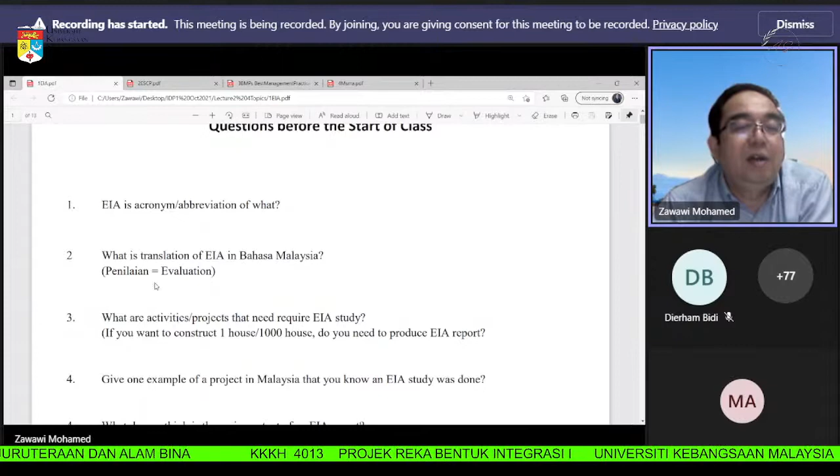What is the translation of EIA in Bahasa Malaysia? Sometimes people say it is penilaian kesan alam sekitar, but penilaian actually is evaluation. So the correct translation: assessment is penaksiran. So penaksiran kesan alam sekitar.

Okay, what activities or projects require an EIA study? Think about it. If you want to build one house, do you have to do an EIA study? No, right? If you want to build 1,000 houses, do you need to produce an EIA report? Let's look at the notes after this. Number 4: give one example of a project in Malaysia that you know an EIA study was done for.

Because if you read newspapers or papers online, you will come across articles talking about EIA studies, right? Can you recall what project that was? Oh, this is number 5. What do you think is the main content of an EIA report? When they do an EIA study, of course they will produce an EIA report. What do you think is inside the report?

What are the benefits of an EIA study? An EIA study is quite expensive. Normally it was maybe 500,000 many years ago, and a detailed study is several millions. So when the government makes it mandatory for a developer to produce an EIA study, there has to be a very good reason, because it is expensive. So what are the benefits? We will look at that after this.

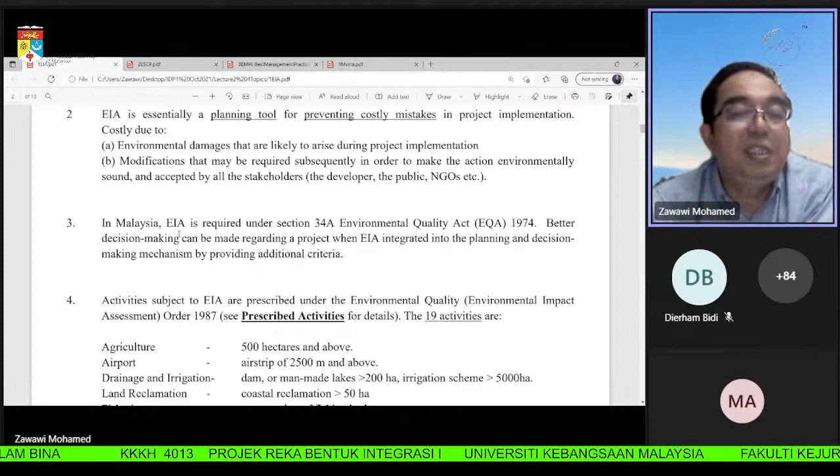Okay, number 3. In Malaysia, EIA is required under Section 34A Environmental Quality Act, EQA 1974. Better decision making can be made regarding the project when EIA is integrated into the planning and decision making mechanism by providing additional criteria. So the main point here is you list out all the possible impacts, and then you let the authority, basically the government, decide lah. So the government can make better decisions when they have all the correct information.

Okay, number 4. Activities subject to EIA are prescribed under Environmental Quality Order 1987. The activities are called prescribed activities. So there are 19 prescribed activities lah. Agriculture, 500 hectares and above. So if you want to tanam jagung 10 hectares, no need EIA. And then you have airport, drainage, irrigation, land reclamation, greater than 50 hectares. Fisheries, forestry, logging,

greater than 500 hectares. Housing, I asked earlier, if you want to build one house, do you need to produce an EIA report? No. If it is bigger than 50 hectares, yes. Industry, infrastructure, ports, mining, petroleum, power generation, quarries, railway, transportation, details are given lah. Of course, if you go read the EQA Order 1987, there will be more details there. But this gives you enough information lah to know.

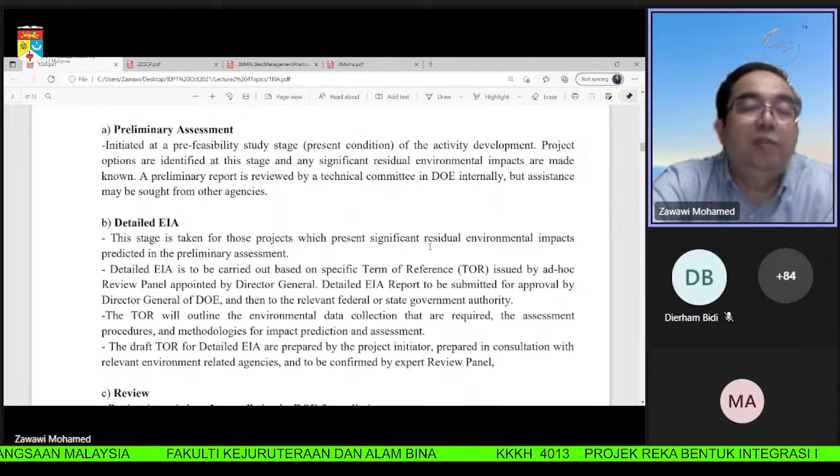Okay, EIA in general can be divided into 3 steps. Number 1 is preliminary assessment. Number 2 is detailed EIA, the stage taken for projects which present significant environmental impact lah. So the DOE will ask for a detailed study. This will be more expensive lah. You need to collect more data, etc. And then C is review, done internally by DOE and review panel lah.

Okay, number 6. EIA can help reduce the possibility of an environmental disaster. An example is the Bhopal disaster or Bhopal gas tragedy, which is a gas leak incident in India, considered as one of the world's worst industrial catastrophes. This occurred in 1984. Later, if you have time and you like to know more, Google Bhopal disaster. Very, very sad incident, because the gas leak killed many people and caused many injuries lah.

The injuries caused people to be blind. Some sort of acid damaged the eyes, caused people to be blind. Very, very sad incident lah. You can read here, 558,000 injuries. We don't want that. Imagine a disaster like this happening in Malaysia because you are careless or you allow a bad project to proceed. So very important to be ethical lah. Do your job as a civil engineer as best as possible.

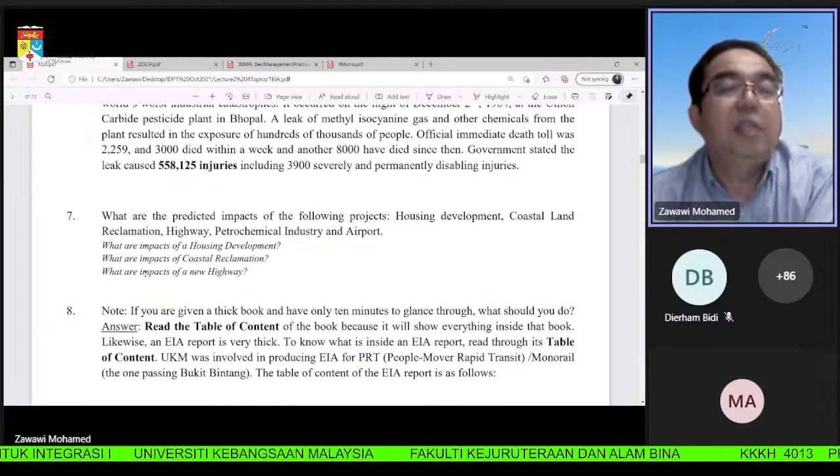Okay, number 8. If you are given a thick book and have only 10 minutes to glance through, what should you do? My suggestion is you read the table of contents, because it will show you everything inside the book lah. Likewise, an EIA report is very thick. To know what is inside, you look at the table of contents. So this is for one project that UKM was involved in. I was also involved in this project lah. It is the monorail project. Earlier, it was called People Mover Rapid Transit, PRT. So this is the EIA report for that project lah.

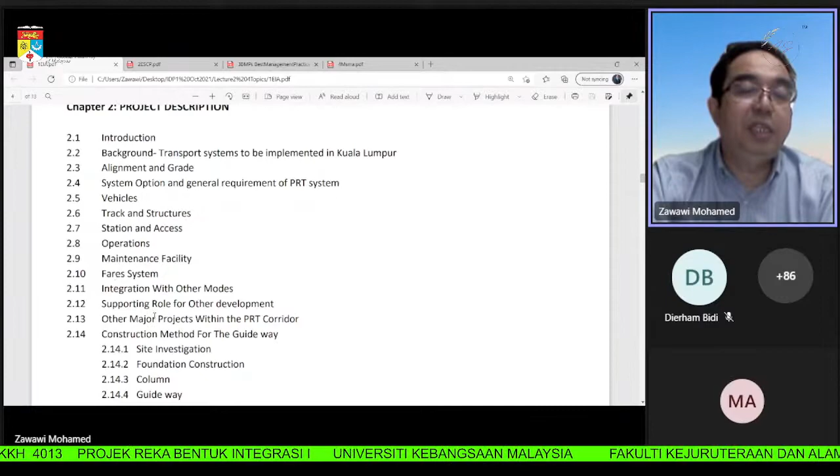Let's go through. Chapter 1 is introduction. Statement of need, route options. This is basically general information about the project lah. Now, chapter 2, project description. Vehicles, track and structures, maintenance. More information about the project. Here you can see construction method for the guideway. Implementation schedule. That is basically more information lah.

Okay, now we go to chapter 3, existing physical environment. An EIA report includes this very important chapter, existing physical environment. What info do you put there? You can see here, topography and climate. This is the physical environment before the project starts. So you give data about geology of KL, seismicity, land use, water quality. If there is a river, then you take the water sample, you determine water quality. Why? Because later on, if the public complain your project caused damage to water quality, you have data to prove.

No, we check the water quality before the project. It is already like this, for example. Then you protect your project lah from baseless allegations or something like that. Yeah? Same as air quality, noise level. You want to know the physical environment before your project. Okay, vibration level, existing traffic, biological system, socioeconomy, etc.

Because if you want to, for example, build a noise barrier, it is expensive. Everything will be expensive. If you want to rehabilitate a river, things like that, it's expensive. So you have to make sure the damage was actually caused by your project, not by other things. That's why you need this chapter 3, existing physical environment.

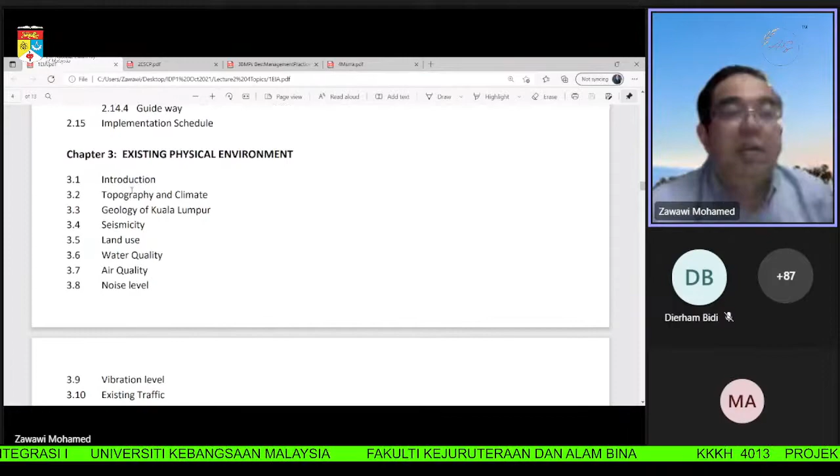Okay, chapter 4. Now I said earlier, the main content of an EIA report is the list of potential impacts and mitigating measures. So you can see here, chapter 4, potential impact and mitigating measures during construction. Let's look at chapter 5, potential impact and mitigating measures during operation. So they do both. This is during construction, and then after that you also do it for during operation.

So if you look here, 4.2, list of construction activities. When we want to know or to predict the impact, we have to know what the activities are. So you have to know the whole thing about your project, then list the construction activities. Then only you can identify the potential impacts. So you list construction activities and then you consider the impacts in the aspect of geotechnique, water quality, air quality, noise level, vibration level, biological system, socioeconomy, blah, blah, blah.

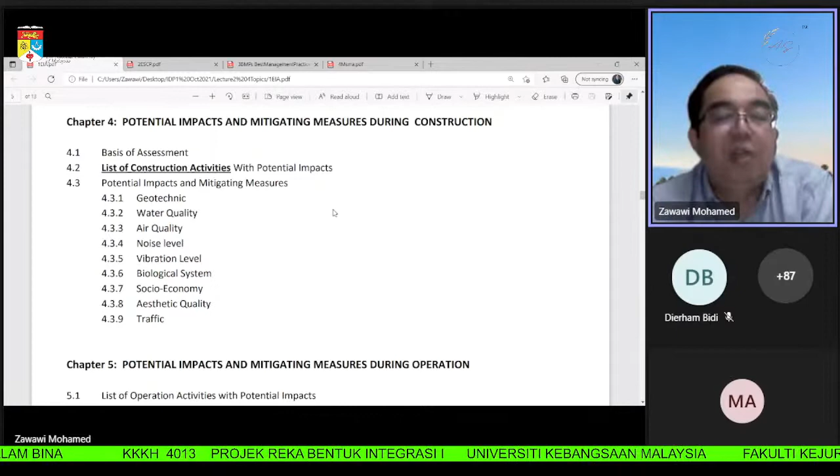Okay. Then chapter 5, the same thing. This one is potential impact and mitigating measures during operation. Okay, if you consider the PRT project, during construction, what is the noise? The noise may be piling, right? Preparing the foundation and then all the works lah. After the project has been completed, is there still a noise problem? Yes. When the train passes through, there will be noise. Right?

What are the impacts? There are many lah. That's why you have to list. Here, chapter 5, potential impact and mitigating measures during operation, and then you list in the aspect of water quality, air quality, blah, blah, blah. Okay, chapter 6 is not really related to EIA lah, but you can go through it to understand the content of an EIA report. So you have emergency response plans. If there is a disaster, things like that, you have to consider that.

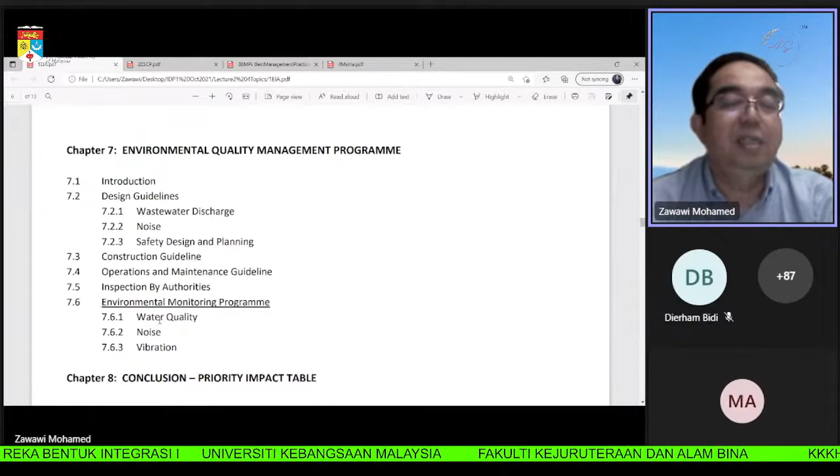Okay, chapter 7, environmental quality management program. Environmental monitoring program. So some projects, during operation, continue to take data of water quality, noise, vibration, to make sure that the project does not damage the environment. Of course, if you are building a very tall building or something like that, that one no need lah. Definitely there will be no changes to noise, things like that. Okay, chapter 8, conclusion and then priority impact table. Okay, that is basically the EIA report lah.

Okay, so here is my comment. Number 9, chapter 3 is existing physical environment before the project starts. Here you need to get the baseline data. And then later, during the construction phase, you get another set of data, so that you know what the impact of your project is to the environment during construction. Okay, here in the operation stage, you take another set of data.

So you have all this data, then if there are public complaints, etc., you have the data to back up your comments lah. For example, my project did not do this, did not do that. You have the data to prove it lah. Number 10, the difference between these three sets of data, pre, during, and post construction, shows the impact of the project on the environment. If the difference is too significant, more mitigating measures need to be added to reduce the negative impacts. So you will know what to do based on the data that you collect.

Okay, number 11. Another project in which UKM was involved in producing an EIA report is as follows. From the write-up below, you can get information on the content of an EIA report.

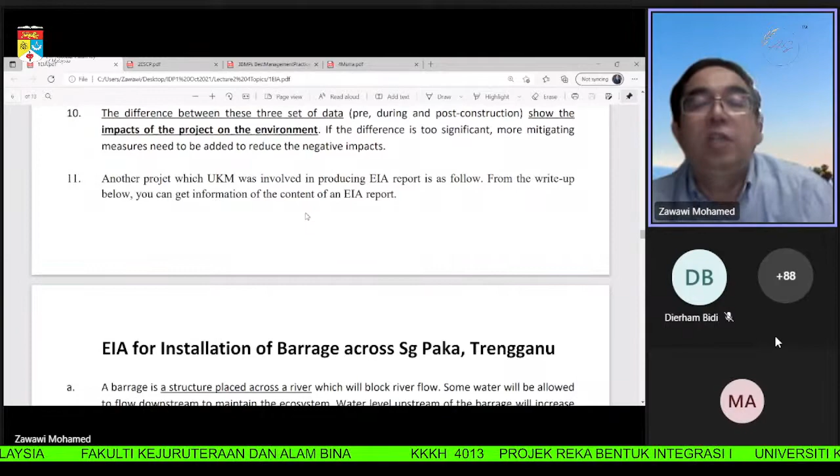Number 11. Another project which UKM was involved in producing a report is as follows. From the write-up below, you can get information on the content of an EIA report. This is another project I was involved in: EIA for installation of a barrage across Sungai Paka, Terengganu.

What is a barrage? A barrage is a low structure placed across a river. If you look from far away, you cannot see it, because the structure is under the water surface. Its purpose is to cause the water level upstream of the barrage to be higher, to be increased.

Let's go through the report. The main content of an EIA report will include the following: list of project activities, potential impacts, and proposed mitigating measures to reduce the impacts. So the first one is project activities.

Imagine you want to build a barrage at Sungai Paka in Terengganu. What are the activities for that project? Number one, you have to construct an access road, because you need to bring heavy vehicles into the project area. When you construct the access road, there is already impact to the environment.

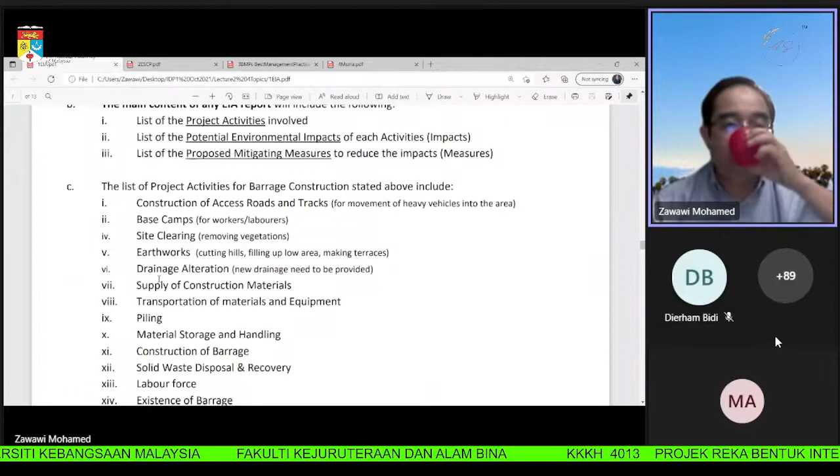One moment. Otherwise, I lose my voice.

And then supply of construction material - you have to imagine the sequence of things you need to do at your project, for example transportation of material equipment, piling, material storage handling, and so on. There are many activities. After you list down the activities, then you start to think about the impacts of each of these activities, each component of the activities.

Let's look at the impacts. It will look like this: the construction of access road impacts - erosion of soil and rock may occur during raining time. When you construct the access road, you remove the vegetation on the soil because you want to put in the gravel, the small stone. So if it rains, the rainwater will carry the loose soil into the river. This is the impact.

So what are the measures? What do you do to solve that problem? Drainage ditches must be well designed. Another impact: visibility reduced due to dust clouds generated by vehicles or dispersed by wind gusts. Although you put in the gravel, there will still be loose soil - if it is dry and windy, there will be dust clouds. So what measures can you take? Water should be lightly sprayed onto the affected area.

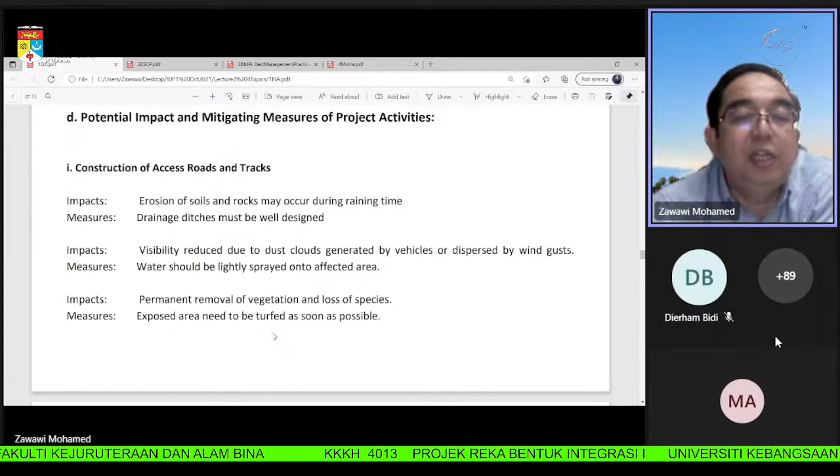Impacts: permanent removal of vegetation and loss of species. Measures: the exposed area needs to be turfed as soon as possible. So you can see here how you list down the activities, then the impacts, then the measures. That way you tackle one by one all the possible problems. Okay, let's look here.

Earth disturbance would increase water turbidity and suspended solids. Some developers, because they want to save cost, when they rent a bulldozer, they bulldoze everything. That is not good for the environment.

You should minimize the removal of trees, because when you minimize it, the roots of the trees continue to hold the soil, so you don't have much erosion there. So the measure says earth disturbance should be minimized, cut as few trees as possible. Disturbed earth surface and slope should be recompacted and planted with grass as soon as possible. So when you compact, you spray grass seeds, the grass grows, and then there will be less erosion after that.

Impact: construction of access road can be hazardous to local people and the public. Measures: warning and signboards. So you can see how you basically tackle one by one all the possible problems that might arise.

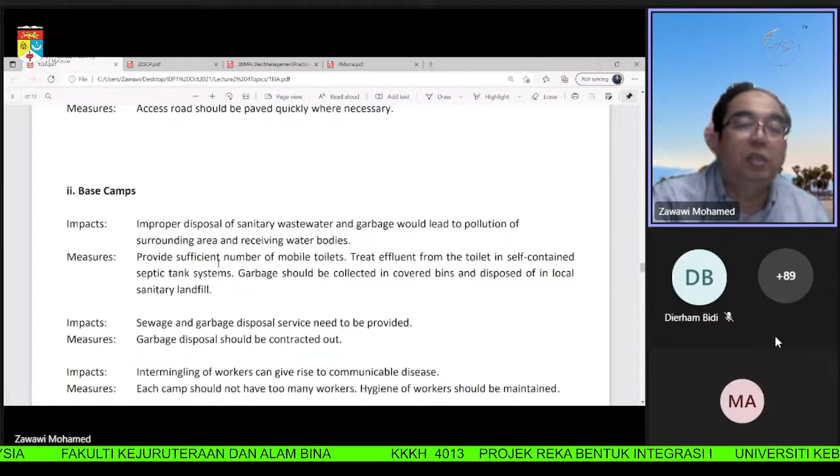Okay, let's look at base camp. Base camp will have its own problems. Improper disposal of sanitary wastewater and garbage could lead to pollution. Measures: provide sufficient number of mobile toilets, and garbage should be collected.

So you go through one by one to understand site clearing, what are the impacts, what are the measures. Earthworks, what are the impacts. This, for your end of semester presentation, you need to put in also.

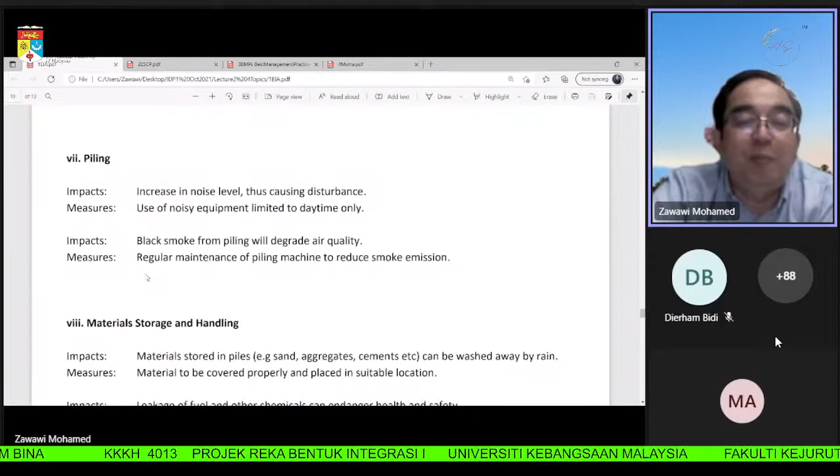I ask you to provide one chapter for EIA, so that you need to think about the components of your project. But the main points are already in here. You just look at which one is suitable, which one fits your project, which one doesn't fit your project. Don't copy paste everything, then we know, and we punish by giving you low marks. Because each project has a different list of activities, then definitely the impacts and measures will be different.

These notes are gathered online, I just Googled and copy pasted them here. You can read this yourself: environmental definition, environmental assessment, objective. Why do we need EIA? To prevent environmental problems and seek to avoid costly mistakes. Remember the Bhopal incident? We don't want 500,000 Malaysians to be seriously ill. That's why EIA is very important to protect the public mostly, and also to protect the environment.

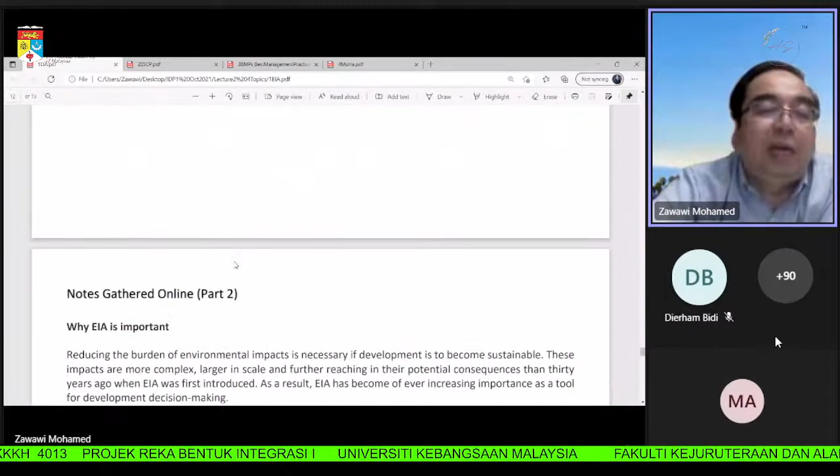Regulation in Malaysia regarding EIA: EQA 1974 prescribed activities. If you want details, you can Google and go to the EQA 1974 write up. This is more things I gathered online, I'll let you read this.

Any questions about this? Class, any question? No questions? Okay, you read it later, you can read it yourself.

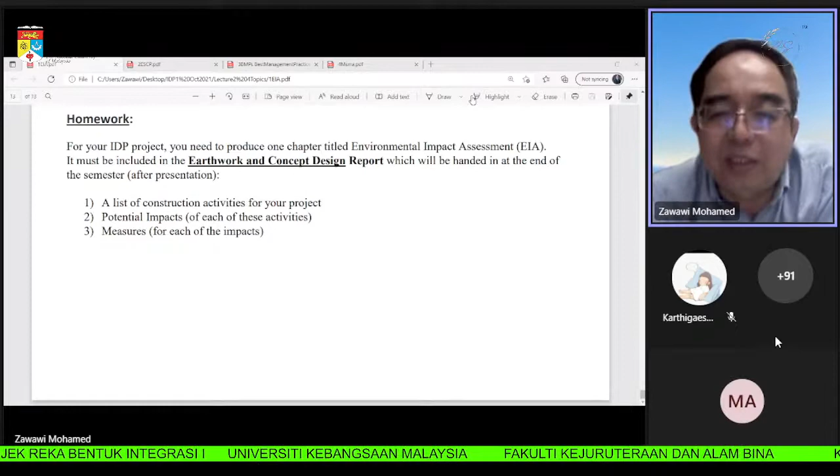I will share this one. I want to go to the next topic, let me change my slide. Okay, and then I will share this one too.

Wait a moment. Okay, can one person confirm for me, can you see the slide erosion sediment control plan? Yes sir, can, thank you. Yes doctor, can, okay thank you.

Erosion and sediment control plan, ESCP. If you are a civil engineer, you have to be very familiar with this, again because we want to protect our environment. So when you come across ESCP, remember it stands for Erosion Sediment Control Plan, meaning the plan you put in place to control erosion and to control sediment.

Most developments require clearance of vegetation from the project site. Removal of trees and vegetation results in production of loose soil. When it rains, the rainwater will carry this loose soil into the drainage system and eventually into the river. If there is so much loose soil, the river will become shallow, and when there is monsoon season or heavy rain, you might have localized flood because of this. That's why we want to protect our environment, it will cause damage to property and things like that.

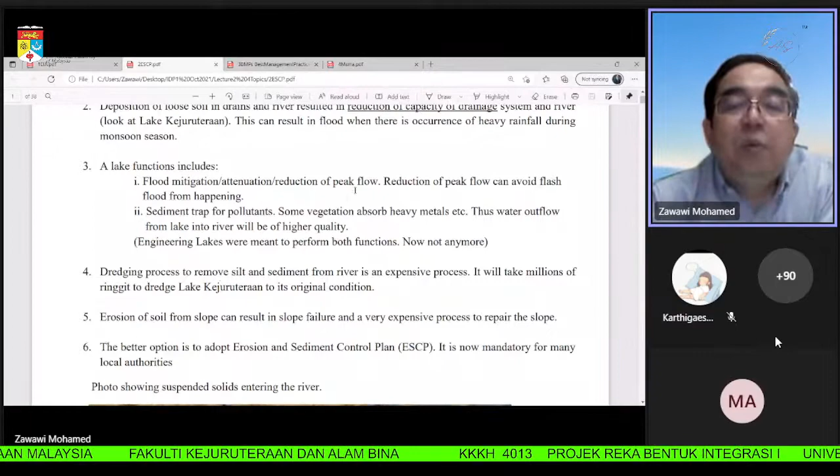Okay, let's look at number three. Lake functions include, what are the benefits of a lake? It helps in flood mitigation. It reduces peak flow, which can avoid flash floods from happening. It also acts as a sediment trap for pollutants. Some vegetation absorbs heavy metals.

If you remember Putrajaya Lake, they have wetlands. Water from the river will pass through wetlands and then only enter Putrajaya Lake. So the wetlands remove the pollutants. They plant some vegetation to absorb heavy metals from the water, so the water becomes much cleaner.

Dredging to remove silt and sediment from a river is very expensive. For Kejuruteraan Lake, if you are to dredge the soil and restore the original lake, they made a calculation. It would cost, if I'm not mistaken, 3 million or something to dredge all the silt from the lake.

Very expensive. Number 5, erosion of soil from slopes can result in slope failure, and repairing the slope is a very expensive process. The better option is to adopt an erosion and sediment control plan. So you follow what is in the ESCP, then you will not cause damage to the environment.

In Malaysia, it is now mandatory for many local authorities. So let's say you want to do a project in Kajang or in Bangi, you have to prepare an ESCP for your project area. What is the plan to solve this erosion and sediment problem? So you produce this plan and then pass it to the authorities.

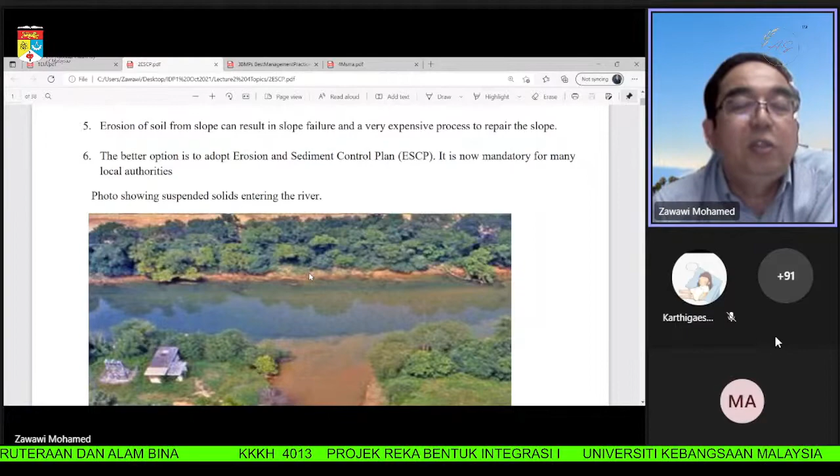Let's go through some effects showing how serious the problem of erosion and sedimentation is. I Googled photos online so you can see here. When you see water like this, what does it mean? Here it is clean, right? Clean water, not much suspended solids, meaning upstream there is not much erosion. But this river branches upstream, and definitely there is erosion happening. From what? Most likely people are clearing the soil. They remove the vegetation, and when you remove the vegetation, you produce loose soil. That loose soil will then enter the river.

Okay, here is another example. You can see clear water, and then this is water filled with suspended solids. Here is another example. This river upstream is okay, but this small river, yeah, there is erosion upstream. Here's another example, something's happening upstream.

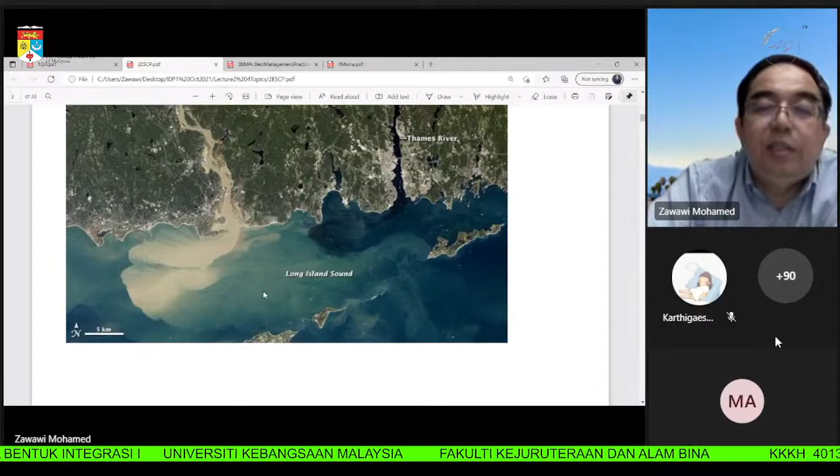This satellite photo, is it? This shows very serious erosion upstream. This is at sea already, I think. If it is at sea, not so bad, because the tidal action etc. will remove this sediment. But if it is a lake, then your lake will become smaller, and it will become damaged like Lake Kejuruteraan.

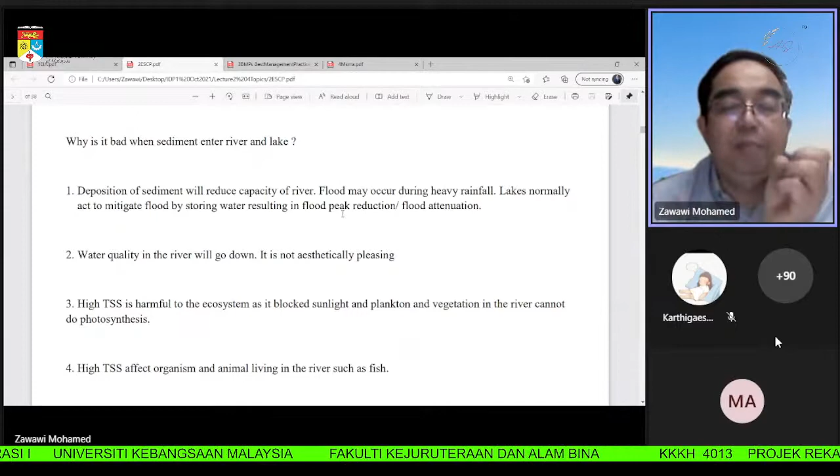Okay, why is it bad when sediment enters a river and lake? Number one, the deposition of sediment will reduce the capacity of the river. Flood may occur if you have heavy rain and big runoff, then the capacity of the river is not enough, it will overflow the river banks, then you have a flood.

Number two, why is it bad? Because water quality in the river will go down, since when you have suspended sediment, water quality goes down and it is also not aesthetically pleasing. And if you have fish and various animals inside, it will affect all these animals, it is not healthy for them either.

Number three, high TSS is harmful to the ecosystem as it blocks sunlight. Plankton and vegetation in the river cannot do photosynthesis, so you damage the whole ecosystem. Suspended solid is harmful to the ecosystem.

Because if the plankton and vegetation cannot do their photosynthesis, then maybe they start to die off, and after that the fish will die, and then the ecosystem will be damaged. Number four, high TSS affects organisms and animals living in rivers, such as fish.

Okay, question. You are a civil engineer at a large construction site where a large area needs to be cleared of vegetation. What can you do to avoid what happened above? You can see how the sediment is carried by the water into the river. So you don't want that happening at your project. What do you do? Some people protect the environment not because they love the environment, but because they are afraid of penalty. So think along that line also.

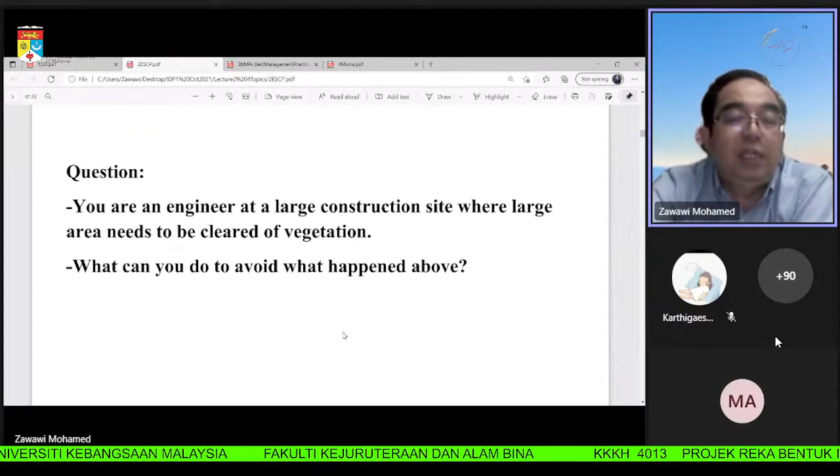Because if the authority finds out you are damaging the environment, they can give you a stop work order. With a stop work order, you cannot do anything until you solve the problem. Then it will cost you a lot of money. The owner of the project will be very angry, very unhappy, because when you stop work for, let's say, 2 weeks, it costs a lot of money. So follow regulation, follow the ESCP, and avoid the problems.

Okay, my question here is, what can you do? To avoid this problem, the construction industry needs to adopt best management practices, BMPs. Look at the MASMA manual for the chapter on BMPs. I think you got the soft copy, right? If you don't, Google the soft copy of MASMA. Go through the table of contents and find the chapter on BMP, best management practices.

Okay class, for IDP, as I said earlier, it is different. IDP and FYP are different compared to your other courses. You have to do all the work yourself, search the manuals, read through them, meaning a lot of self-learning. Other courses, you have the textbook, you read, you understand the chapter, you take your midsem and final, and everything is done. But IDP is different. There are many manuals for JKR, for DID, etc. You need to read all these manuals to understand how to do the design. That's why it becomes problematic to many students.

I introduced the MASMA manual to you in hydrology class in second year, right? So go to the MASMA manual. There are many chapters. Find the chapter on BMPs. There is info there. So please add all this in your IDP final report with more contents. Meaning take out the main points from your MASMA manual, then put them into your IDP report, the concept design.

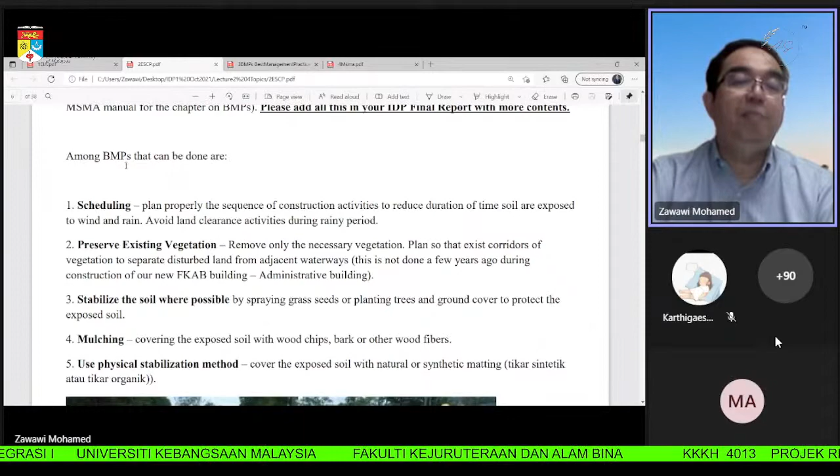Okay, here I list what you can do, among BMPs that can be done. Again, BMPs is best management practices. Number one, scheduling. Plan properly the sequence of construction activities to reduce the duration of time soil is exposed to wind and rain. Avoid land clearance activities during rainy periods.

For example, your project is in Kelantan, on the East Coast, and you know on the East Coast October, November, December is monsoon season. A lot of rain. Sometimes it rains every day for 1 or 2 weeks, maybe light rain, but it continues. So imagine if you clear the land at that time, the rainwater will carry so much sediment into the river. So you have to schedule it properly. And reduce the duration of time soil is exposed. Meaning you clear and immediately put gravel and turf, compact it, spray grass, etc.

Okay, number 2, preserve the existing environment. Preserve existing vegetation. Remove only the necessary vegetation. As I said earlier, don't bulldoze everything. Some contractors want to make it easy for them, remove everything so they don't have to rent the bulldozer again. Maybe you save money there, but when there is a lot of sedimentation and erosion, DOE gives you a stop work order for 1 month. Then you lose a lot of money. So it is not worth it. Protect the environment, then you will not be penalized severely.

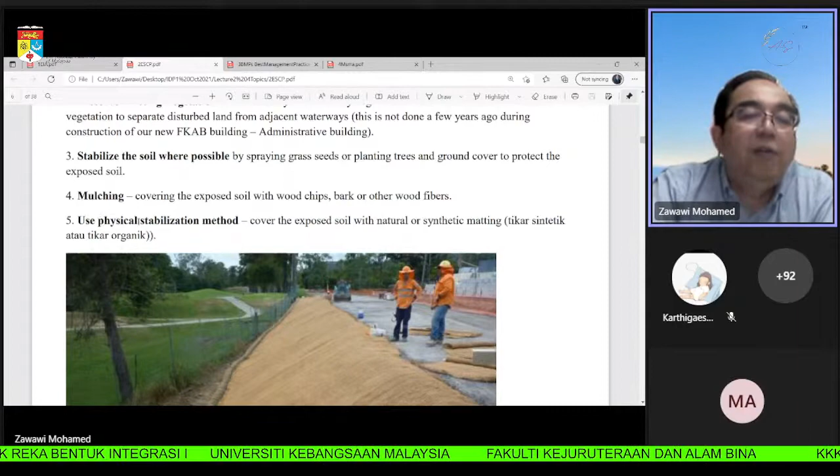Okay, number 5, use physical stabilization methods. You can use synthetic matting or other things, natural or synthetic mat. Example is here, I Googled. So this is I think natural matting. From this maybe the coconut husk. They make it into a mat and then just cover it. So this will significantly reduce erosion.

Normally, if you don't have this, the rainwater comes down. It contains energy because it comes from high up, right? So the impact on the soil will dislodge the soil particles, and the rainwater will carry them to the river. Okay, number 6, dust control, spray water on exposed soil, especially during windy times.

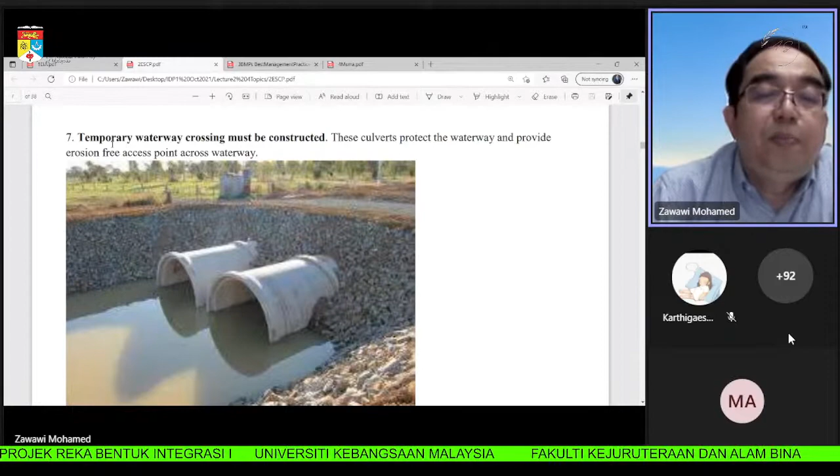Okay, number 7, temporary waterway crossing must be constructed. This depends on the location of your project. What is the condition of your project site? If you have a large flow of water, then you need to construct a temporary waterway. Okay, imagine this is your project site, and you don't build this temporary waterway.

So when the heavy machinery wants to pass through, it will pass through the banks of the river. So the river banks will be damaged, and as water passes through, it will carry so much sediment downstream. If there is heavy rain, large flow, then so much of this will be eroded. Without the temporary waterway, heavy machinery will cause failure to the banks of the waterway. Rainwater will erode the bank and increase erosion. So if you do it like this, then the erosion is significantly reduced.

Okay, number 8, access road must be stabilized, because we know heavy machinery will continue to use the access road. So how do you stabilize it? By compacting the soil, by spraying grass seed. As the seed grows, the roots will hold the soil together. Things like that.

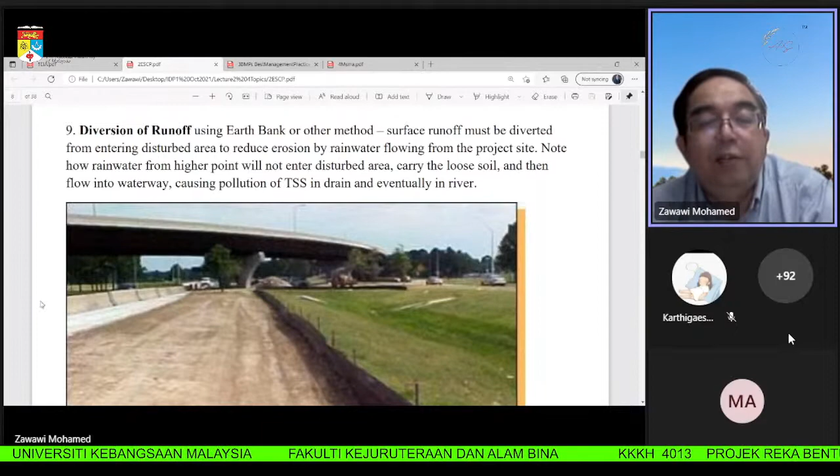Diversion of runoff. Okay, this is also interesting. Using an earth bank or other method, surface runoff must be diverted from entering the disturbed area to reduce erosion. How does this work? Let's say you have a hill to the left. When it rains, the hill water will flow down, and if it enters this disturbed area, it will carry all the soil from this area into the river. So here you divert the flow from the hills somewhere else so that it doesn't enter this area.

Okay, build slope drains. For your project, you will need to do this, because you will use the forest reserve of UKM, which is a hilly area. So you need to have all this when you build your retaining walls, or at some places maybe you produce a natural berm. Retaining walls are very expensive. Remember, when you design your project, you do it based on the 4 criteria: safety, cost, sustainability, and societal. So you want to reduce cost as much as possible.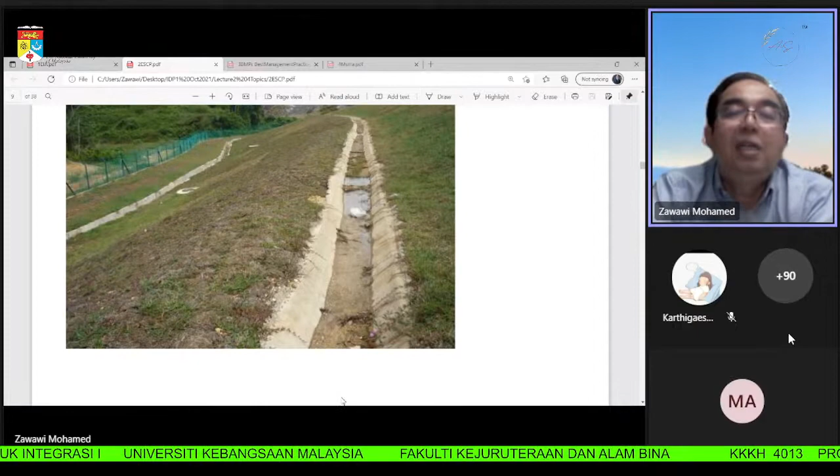Okay, this is not maintained because when the soil fills up this drain, then the water will start to flow out. Then you have erosion. Yeah, so it has to be maintained. If it is maintained, then no problem. Water will flow, accumulate here, and then channel along here, and then it will enter this cascade drain, and then go down to the large drain at the bottom of the highway, the toe drain.

Yeah. Here the toe drain normally will be big, because to design the size of this, you need to calculate the Q. So here I expect the size to be big because the water will flow to this drain. Okay, so this is cascade drain. Okay, you can also do flow velocity reduction. How do you reduce the flow velocity? You can do like this. By constructing a check dam, it will look like this.

If we go through, I don't think we will have to visit. I don't know, Dr. Azab will decide whether we will do the tour of loop 1, loop 2. If we do, actually, we have this check dam close to Kolej Za'ba, I think.

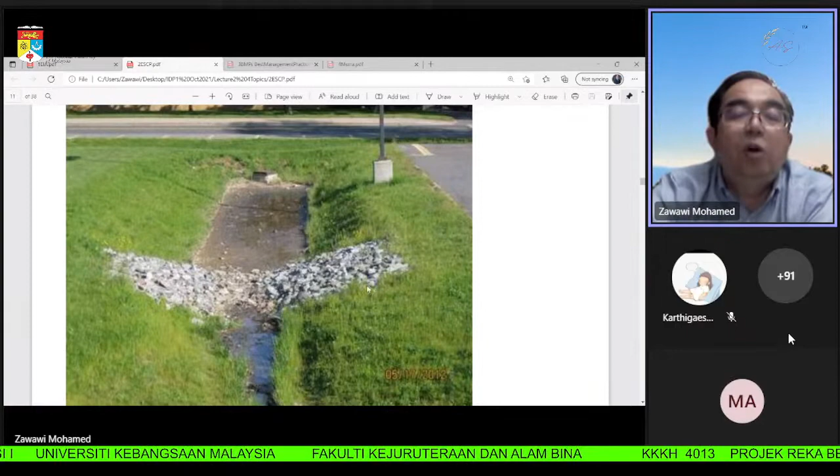The aim is to reduce the flow velocity, because when you reduce the flow velocity, there will be less erosion. If rainwater flows very fast, it will remove the grass, right? When the grass has been removed, the soil will start to be eroded. Then you have erosion problem. Or it will look like this. Water comes in and then the flow becomes reduced. It was blocked by this check dam. So flow reduction occurs. Okay, here you can also construct sediment fence.

Okay, you can also construct heavy-duty silt fencing or sediment fence. I said earlier, when you have a hill, rainwater will flow very fast down. So if the rainwater from the hills passes through your project area, it will carry a lot of silt. So to avoid that from happening, they put a silt fence or sediment fence here. So the rainwater will flow down from the hills, flow alongside here, and then channel to a river or something. But it will not cause erosion at your site.

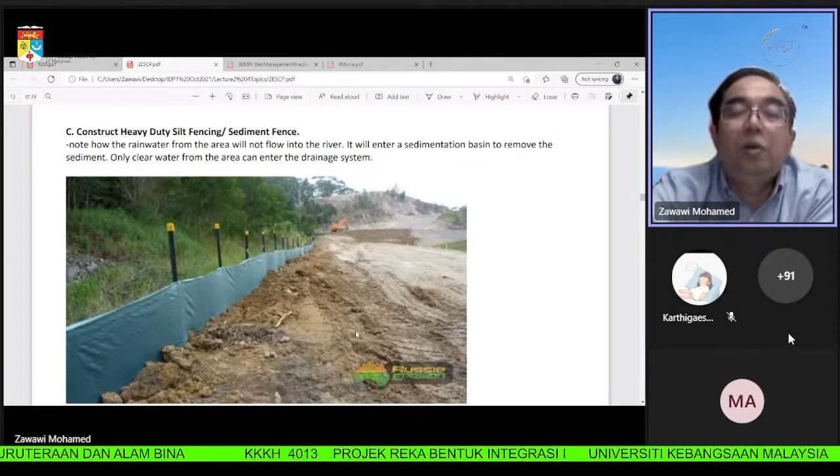Okay, so imagine for your project later, because you will construct buildings, you want to avoid this from happening at your project area. You can see here how the sediment fence is constructed. So when there is no fast flow or heavy flow in the project area, then there will be not much erosion. It will look like this, sediment fence. This is how you drive it into the ground. Or this is another form of it, different one.

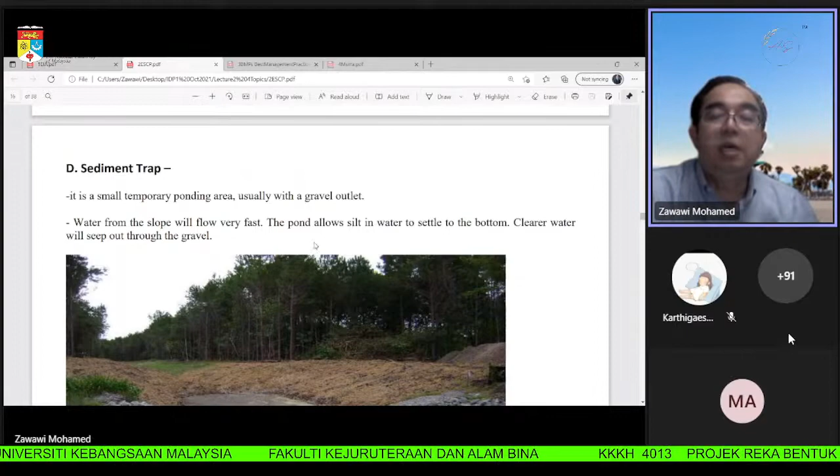Okay, you can also use sediment trap. It is small temporary ponding area, usually with a gravel outlet. Water from the slope will flow very fast. The pond allows silt in water to settle to the bottom. So you can build a pond. Water will flow into the pond and accumulate here, and then you have gravel here. So water will seep through. It will be clean water, and the sediment will be trapped. This is upstream side. Clean water will pass through and flow downstream.

So that means when you do like this, water that flows from your project area into the river will be clean. Yeah, you solve the erosion problem from your project area.

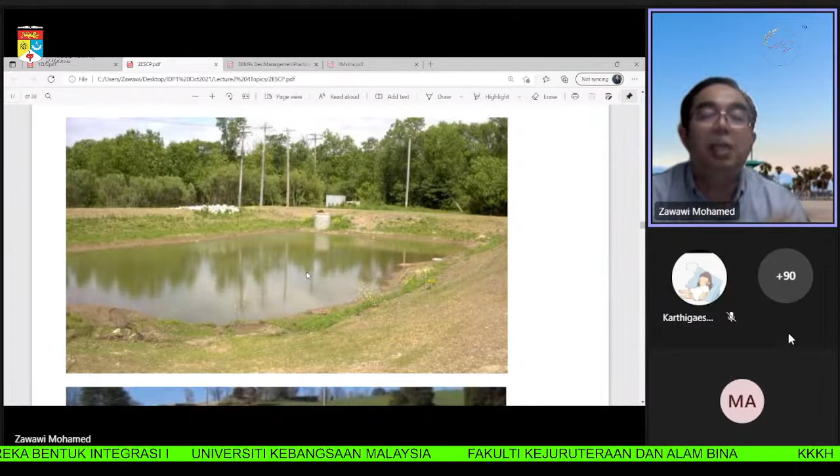Okay, you can also construct a sediment basin. It will look like this. Water from your project area will flow and accumulate in the basin. Then because the basin is big, the velocity of water here will be small. Then the silt can fall down to the bottom of the basin. So you remove the silt from the discharge, from the flow.

Okay, it looks like this. Here rainwater will flow, the water level will go up, and then when it reaches this level, the water will enter here, and then we channel it downstream. So meaning all the silt will be collected here. Water at the top will be much cleaner. Then only it enters and is channelled downstream.

Okay, this is the effect of sediment erosion. Erosion will cause slope failure. So I Googled and read about this article. Photo showing a failed slope, red earth. Note the masonry drain at the bottom. Okay, this is a masonry drain, a rubble wall.

So to repair this is going to be expensive, right? We see many of these slope failures at highways. Normally they will remove all this soil and then put in new big rubble stones, batu-batu, and then they cement it. So after that it will look different, but expensive.

Apa dia ni? What do I want to say here? Photo showing a failed slope. Note the masonry drain at the bottom. What happened here? What caused this damage? What do you think started the problem here? If you look here, there is a drain here, right?

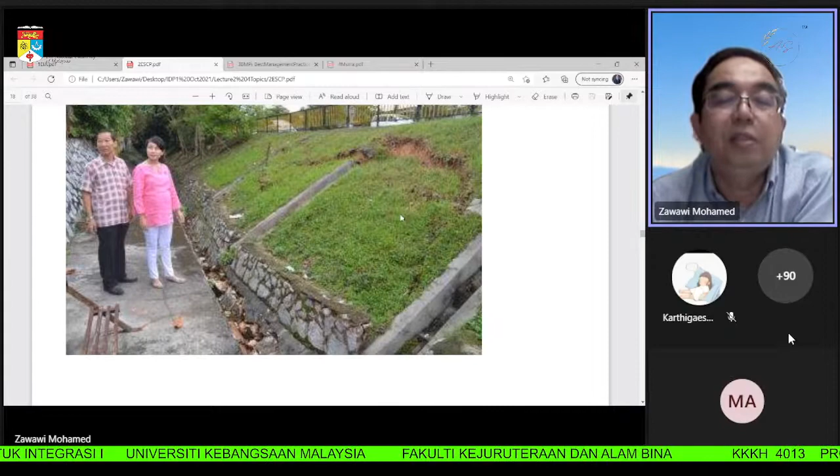I think what started it is there is seepage here. There is damage to the connection between the U-shaped drains. So when there is damage to the connection, water goes under the drain, seeps under the drain, and then it starts to soften the soil on the left and right. And then after that the whole thing just collapses.

Okay, my explanation. This is a concrete drain with masonry or stonework arranged on top, also called a rubble wall. We see so many of these rubble walls. So water will flow through. We have a U-shaped drain at the bottom. It will look like this, a precast U-shaped concrete drain.

Then there will be more and more breakage. After that, when you have heavy flow, the water will seep to the side. So when it seeps to the side during big flow, it softens the soil here. It starts to settle and then the whole thing collapses. Then it will be costly to repair.

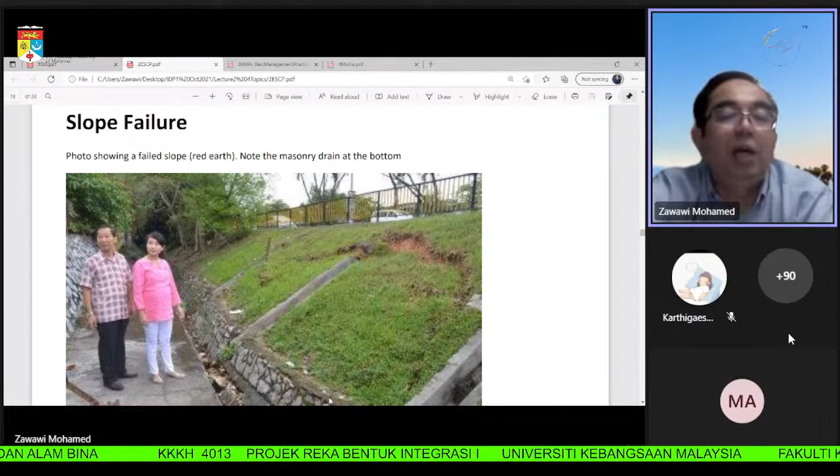If you repair it early on, when you have a small leakage here, then it will not become big like that. This is much cheaper. Why do I tell you this story? Because in Malaysia we don't have this culture of maintaining our infra. We don't maintain. So when the damage becomes bigger and bigger, it becomes very costly to repair. Hopefully in your generation there will be improvement to that.

And then after that, it remains to be seen. If you don't repair it, maybe if there is a very big flow, this wall will start to collapse also. Because the water can soften the soil, and then it cannot take loads. It cannot take the weight of the concrete. So it collapses.

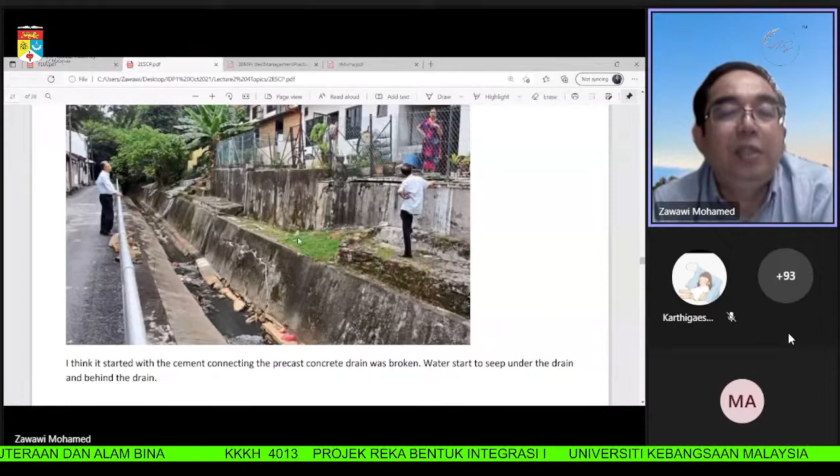Okay, my point is we need to maintain our structures, as it will fail and the cost to repair it will be very high. Okay, I'll give you another example. This is another photo showing a concrete drain with masonry arranged above to protect the slope. This rubble wall, the drain and then rubble wall.

Here I give you another example of what happened to Puri Pujangga at UKM. I think you know this one. Puri Pujangga Hotel in UKM. This is from the other entrance. This is next to Kamsis Rahim Kajai, I think, right? And next to the road to Kamsis Ibu Zain, something like that. So this is Puri Pujangga.

Okay, in the past the drain is like this. Puri Pujangga is to the right. There is a big drain here, and then you have your U-shaped drain, and then rubble wall. I Googled because when there was big damage here during heavy flood, I wondered what happened. So I Googled, then I came across this. Then I noticed the drain.

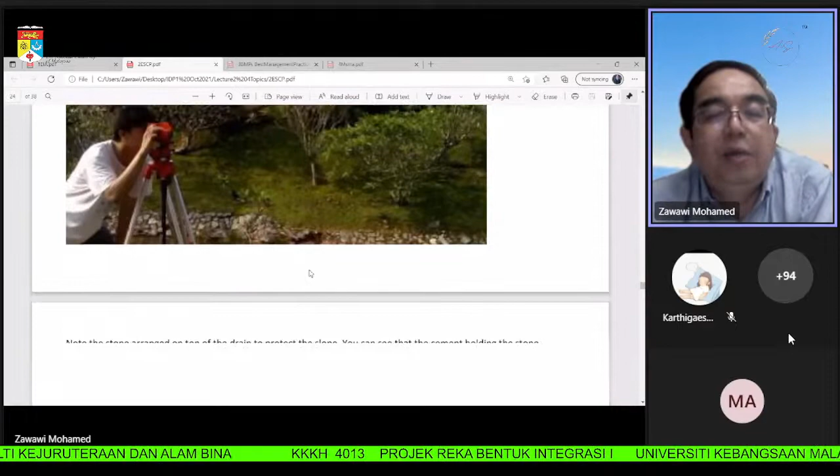You can see here the rubble drain was not maintained. So when you don't maintain, the water seeps and softens the soil behind the rubble wall. So after that, this whole thing collapsed. Last time during heavy flood, very big hole. The water washed away the whole drainage, and also the left and right banks of the drain. You can see the concrete and then the rubble wall. This whole thing washed away.

Okay, this is how Puri Pujangga looks nowadays. Drain is gone, replaced by underground culvert. Total cost to repair is 700,000. The aesthetic of the area now is not as nice as before. Let's look at how it looks now. There used to be a big drain here. Now they put an underground culvert and just cover everything. So it is no longer as nice as before. Why? Because we don't maintain.

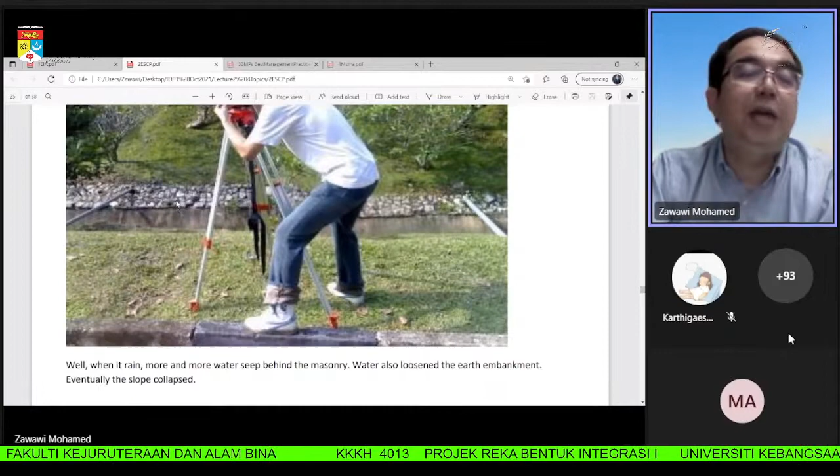When the problems start to appear, if you repair it at that time, it is not expensive. But when you allow it to become more and more damaged, then it becomes very expensive. 700,000 to solve that problem there. The lesson is we must do maintenance work immediately. Some of you during industrial training did maintenance work, right? So you know how important it is to do it regularly and well, so that the damage doesn't become bigger and bigger. Because if not, it will become very expensive to repair. Okay, I think that is all.

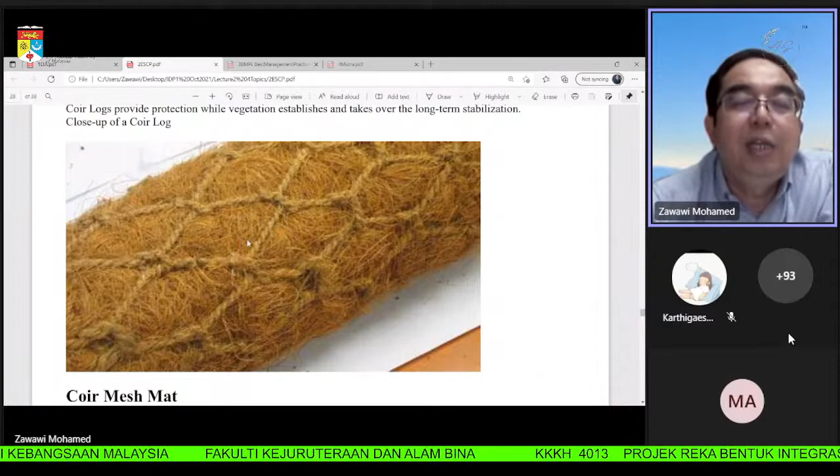This one is a concrete drain, you can see this one. I don't want to go through it. Okay, coir logs, also called fiber rolls, fiber from the outer husk of coconut. We know the old coconut will have this husk. So you remove it and you can make it like this. Coir mesh mat, so you can use this for matting. Synthetic matting. Below, coir logs protects newly planted vegetation from erosion.

Here, coir logs acts as an obstruction across the flow path, which slows the flow and reduces erosion of the slope. So imagine when heavy rain comes down, when you have coir logs, it reduces the velocity of the flow, so there will be less erosion. This one, coir logs arranged to protect river banks. Waves from passing boats will not erode the bank, thus no bank failures.

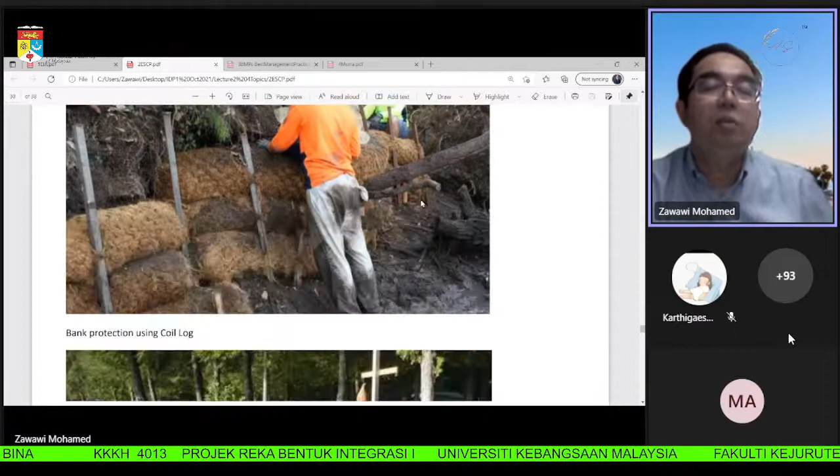Imagine a big boat passes through very fast. The wave will hit the river banks, and the energy from the wave will remove the vegetation and cause the river banks to collapse. So to protect, you can use coir logs. The energy from the wave will hit the coir logs and dissipate, so it will not damage the river banks. Geocell or geoweb, this is another thing that you can do.

Class, I am introducing all these things that you might want to consider using later when you do your project, because your project is on a hilly area. You have to protect your riverbanks, and your duty is to put into your design the things to protect the environment. So you can choose to do all these things. Of course, you need to be able to defend whether it is suitable in the aspect of cost. You cannot just use very expensive methods, because then you are not designing based on the 4 criteria, one of which is cost. Okay, let's look at geocell or geoweb.

Geocells are 3-dimensional blankets of interconnected cells which are placed on slope, secured in position using pins and filled with soil. It looks like this, you fill it with soil, and then you spray grass seed. Then the grass will grow.

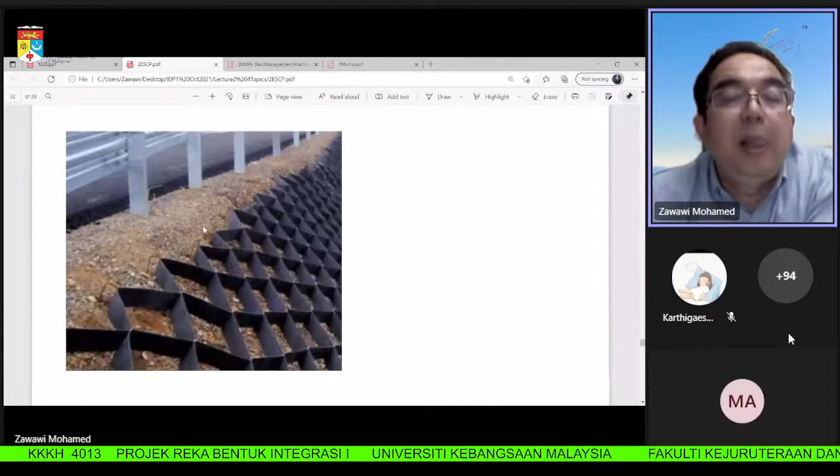This is another form of geocell. You can fill it with soil or with rocks. If it is rock, the weight of the rock will also help in holding this thing together.

Note how geoweb reduces erosion by slowing flow of water over it. Energy in water is dissipated as it flows through the holes. Later on, the grass will grow in all this area and hold the soil even more.

Controlling erosion in coastal and waterway slopes - these are things you can do with geocell as well.

This one is not really related, but I just show you what it is because I think it's interesting - a flushing sediment gate, for when the drain is very flat.

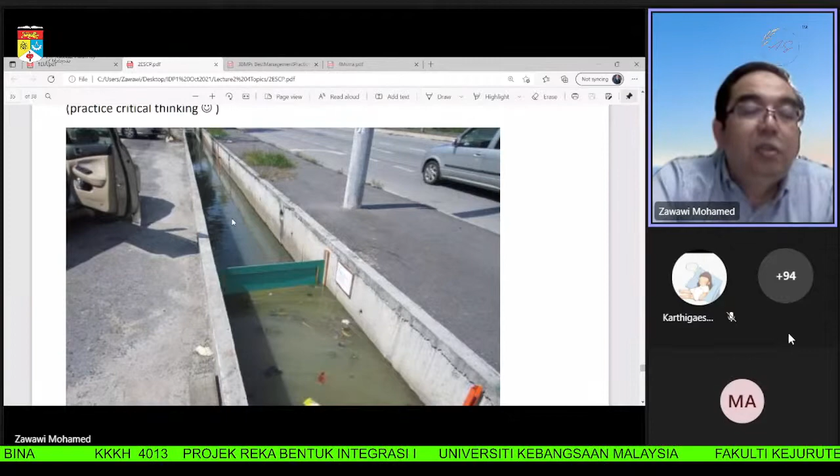To design drainage, there is a certain slope you need to cater to, because we want to achieve a certain velocity - 3 feet per second. You don't want to go higher than that because very fast flow will cause erosion. Very slow flow is also not good, because sediment will start to be deposited inside your drain. So the optimum velocity stated is 3 feet per second, or 1 meter per second.

For this case, the sediment flushing gate - here the slope of the drain is not high enough, so sediment is deposited. This is an interesting thing.

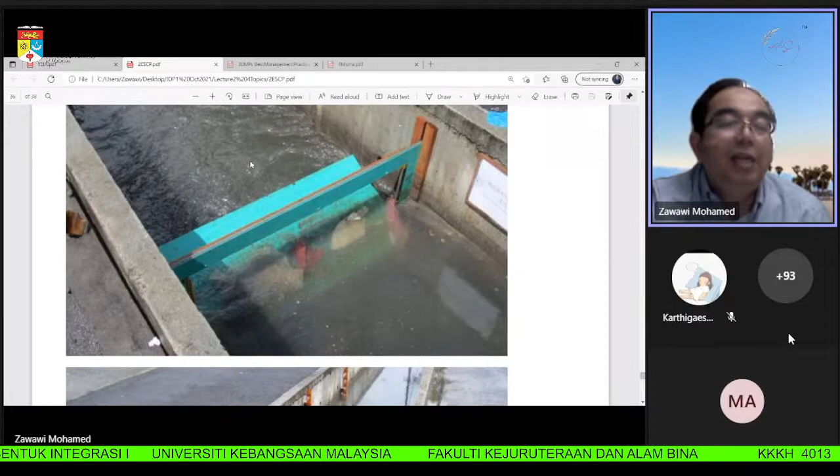They introduce something - the concept is you block the flow, then the water level will rise up. After it reaches a certain elevation, it will push the door open, and when it pushes the door open, the velocity will be higher. Then it will flow fast and remove the deposited sediments. The concept is interesting.

I don't know how effective it is, but the idea is interesting. This one you read yourself - the flushing gate.

You will learn more about slope failures in geotechnic classes. I will leave you with this photo showing serious slope failure of an embankment next to a highway. What is the mistake here? What do you think is the mistake here?

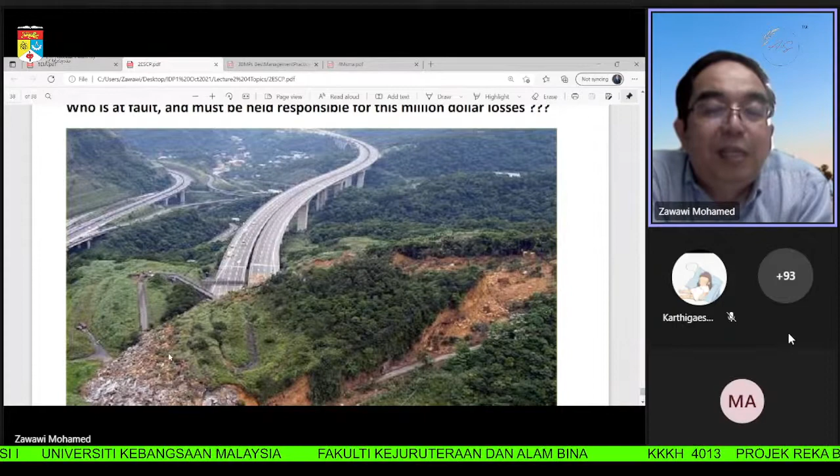If you have a project constructing a highway, of course you will do cut and fill. As I said earlier, you will produce a natural berm, and then maybe in some places you will put a retaining wall, things like that. But after you finish your project, and then this happens, what do you think the problem is? Where is the mistake? I leave you to think about this.

When you work as a civil engineer, if this thing happens to your project, you're in serious trouble, because then they will start the investigation, they will find out who made the mistake, and then you will go to court, and maybe they take away your license to perform as a civil engineer.

If there is a bus here, the landslide could cause, for example, 40 people in the bus to die. Then there is a very big possibility for you to go to jail if you make that mistake.

Remember the 4 criteria: safety, cost, sustainability, and societal. Remember that you never want to see things like this happening to your project, because then it will be very tough to go through the process of court, and if you go to jail because it caused death to people - what happens to your family, and so on. It's a very serious thing. Design is a very important thing.

Jangan, don't do unethical things like accepting bribes from contractors, because the contractor will use smaller steels. What happens if the building collapses? They come back to you. You are the resident engineer, you have to make sure the correct steel is used. Of course they will also go after the contractor for cheating, but you, as a site engineer or resident engineer, you sign because you check everything.

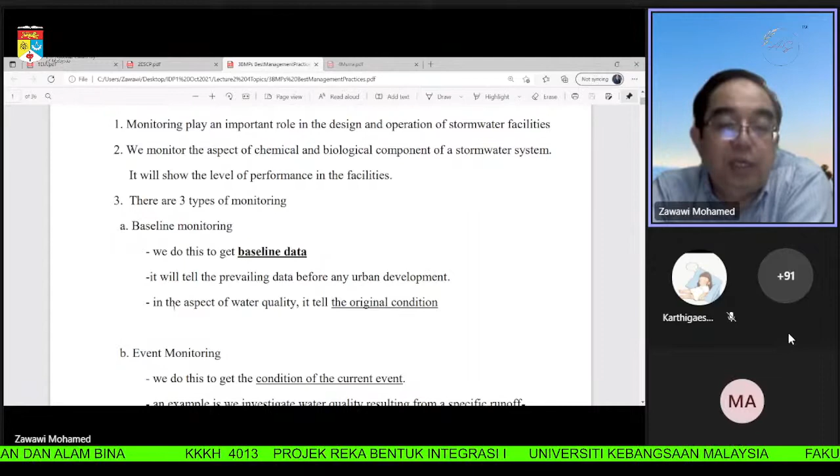One of it here, monitoring. Monitoring plays an important role in design and operation of stormwater facilities. I talked earlier about baseline data - baseline monitoring, we do this to get baseline data. It will tell the prevailing data before you start the project. In the aspect of water quality, it tells the original condition before you start your project.

And then you have event monitoring - the first one is baseline monitoring, then event monitoring, which we do to get the current condition when you are doing your construction. Then you also have stormwater treatment measure performance monitoring. These are all the types of monitoring that exist.

Okay, filtration using swales. If you remember in hydrology class last time, your second year, I introduced you to swales. Swale is considered sustainable drainage - we have the normal concrete drain, or we can also use swale. Swale is considered a green drainage system. Why? Let's read on.

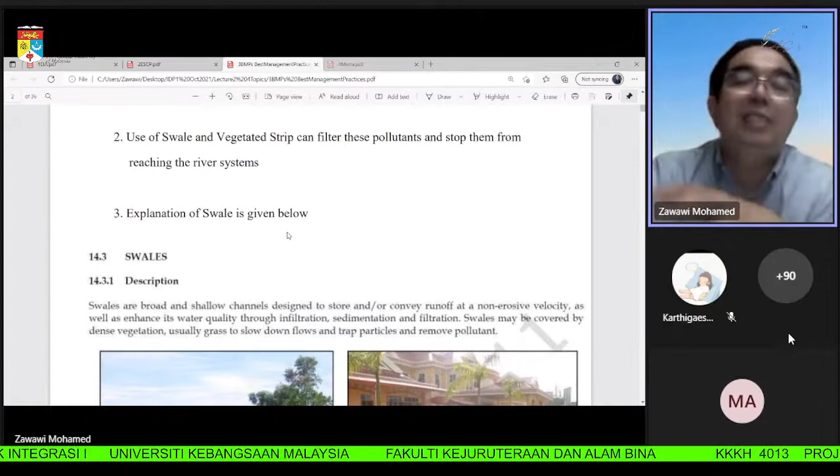Stormwater carries pollutant into drains and eventually into rivers. This pollutant can be from point source like factory, or non-point source like gaseous pollutants from cars found on the ground. Use of swale and vegetated strip can filter these pollutants. So there is benefit of swales because you have grass inside it, so it will filter out all the pollutants.

This one I already showed you in hydrology class last time, it's the same thing. Here at University of Malaysia, they don't use concrete drain, they use swale. So you can see it looks like this. Imagine when it rains, water will flow and accumulate here, but a large portion of water will infiltrate into the ground. The water that passes through will be much cleaner because all the gases, everything will be trapped by the grasses.

Okay, you can see examples of swale - this is from MSMA, this one is from overseas, they also use swale. In a parking area, there will be a lot of diesel leaks, whatever gaseous pollutants accumulate on the road. When it rains, rainwater will carry it into the swale here, so the grass will trap the pollutants, so the water that passes through and flows to the river will be much cleaner.

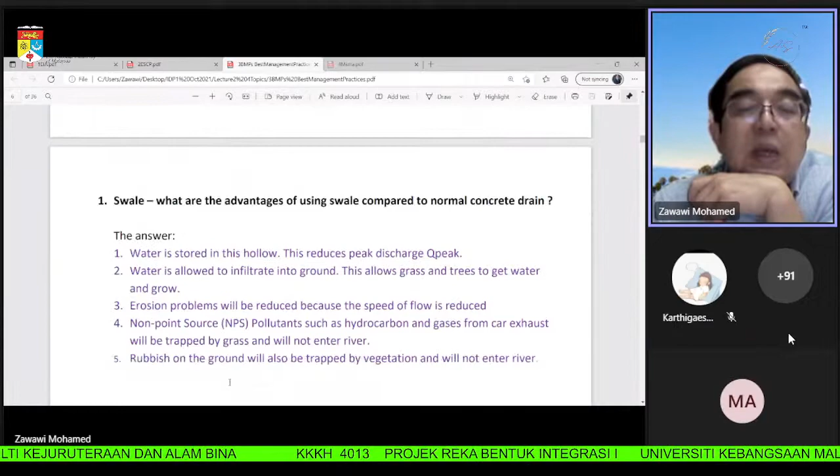So you can imagine it will look like this, then it enters into the underground drain or something. Okay, more examples of swales. What are the advantages of swale? Number one, water is stored in this hollow, this reduces peak discharge. So there is big benefit because you allow water to infiltrate into the ground.

Number two, water is allowed to infiltrate into the ground, allowing grass and trees to get water and grow. If you pave everything, it becomes difficult for water to infiltrate into the ground, so the amount of water that trees can get from the ground becomes much less. This way it is good for the trees, which can get as much water as they need.

Number three, erosion problem will be reduced because the speed of flow is reduced. Number four, this is a big point: non-point source pollutants such as hydrocarbon gases from car exhaust will be trapped by grass and will not enter the river. Rubbish on the ground will also be trapped. So you can imagine, if you use a system like this, the water that flows into the river will be much cleaner.

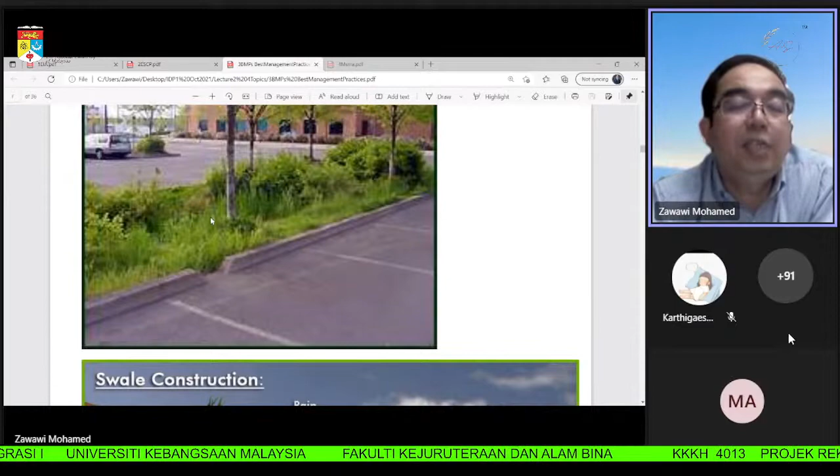Okay, this one also looks nice because there will be a lot of rubbish and also hydrocarbon gases from car exhaust settling down on the parking area. So when it rains, the rainwater will carry it into the swale, and this will filter it, so only clean water will enter the river.

Okay, this one is mulching. On the hillside, you dig a hole and put in wood chips. So when it rains, rainwater will accumulate in the hole you dug and then infiltrate into the ground. Some of it will be held by the wood chips, the mulch, so this will help the trees to get water.

Okay, so many photos of swales. Why do they put stones here? Normally it's because the flow here will be faster, so to protect the grass, they put some stone. The water will hit the stone and the energy will dissipate, so you reduce the energy inside the water.

What is underneath the swale? It will look like this. It is not just grass - you have small stone and then a pipe. So water will infiltrate, filtered by the stone, and then enter the pipe and flow downstream.

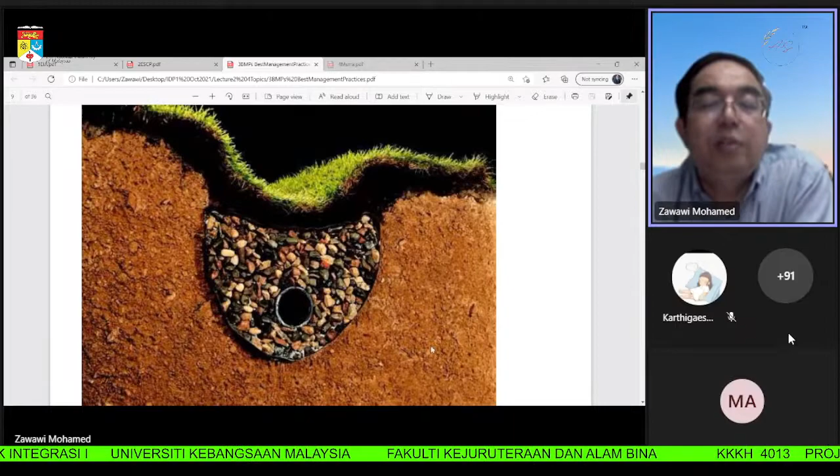This one, the capacity is not much. If you want bigger capacity, you can do like this - put rock, sort of like a gabion, rock inside, and then water will seep in and flow.

Okay, it doesn't have to be grass, it can also be made of rocks. It still does its work.

I think in Johor Bahru, in UTM Skudai, there are several places that do it like this. I noticed it when I went there last time.

Soft engineering - I heard this nice phrase when I visited Tasik Chini. This one we have covered last time in hydrology class, this term 'touch the earth lightly', so I will not go through it again. You can read it yourself, but hopefully when you do your design, you will remember this phrase: touch the earth lightly.

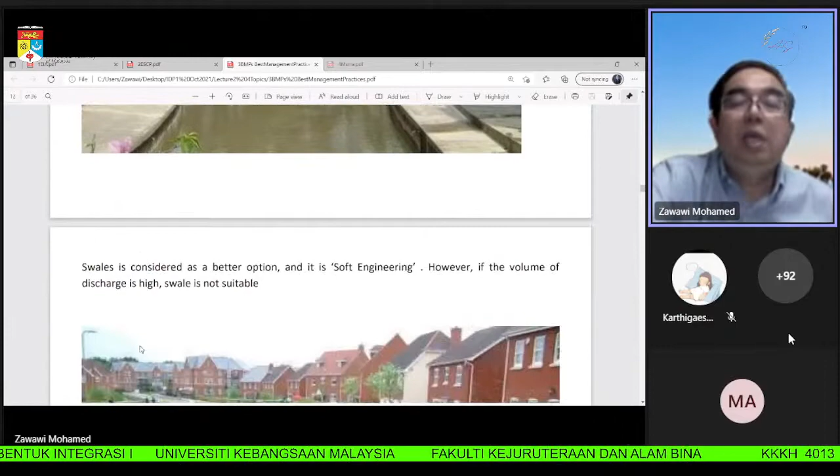Okay, this is soft engineering. You remember this one, hard engineering - concrete lining, you have sheet pile, so no water will pass through. This one is soft engineering - you have earth here and then grass, so water will pass through and infiltrate into the ground.

Again, if the discharge is very, very big - the flow inside the Gombak River and Klang River is very big during heavy rain - that's why you cannot use a swale for cases like this. It has to be like this instead. This one you use if the Q is small, then it is okay, it will not cause erosion.

Oil separator. Okay, you can read this also, we have covered this before - how it functions, the concrete oil water separator.

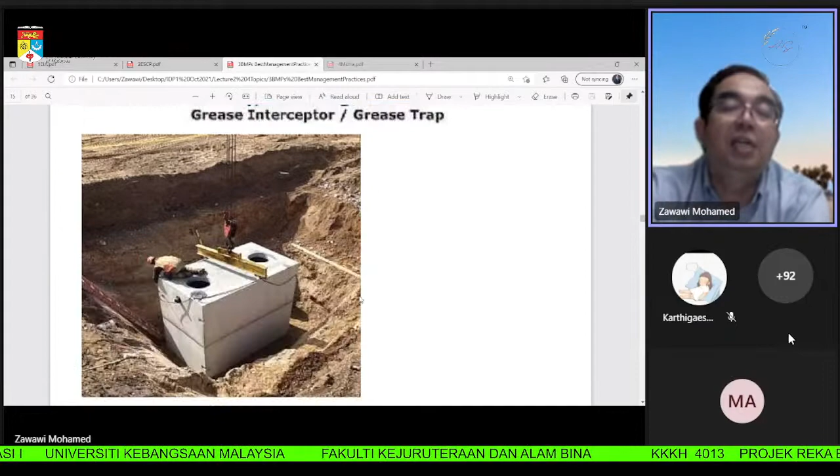All these are considered BMPs, best management practices, because they are an improvement to the previous way of doing things. You can see this very big concrete oil water separator, used to separate oil from your water.

Remember, when we have restaurants, food courts, or pasar malam, there is a lot of food waste and grease from that area. When you wash your hands after eating, there is a lot of grease inside the water. So you collect all this water - you cannot channel it directly to the river, as it will dirty the river. So you channel it to a system to remove the oil. The discharge from the restaurant is channeled to this oil water separator, so you remove the oil from the water, and then the clean water is channeled to the river.

Okay, there are many ways of doing this.

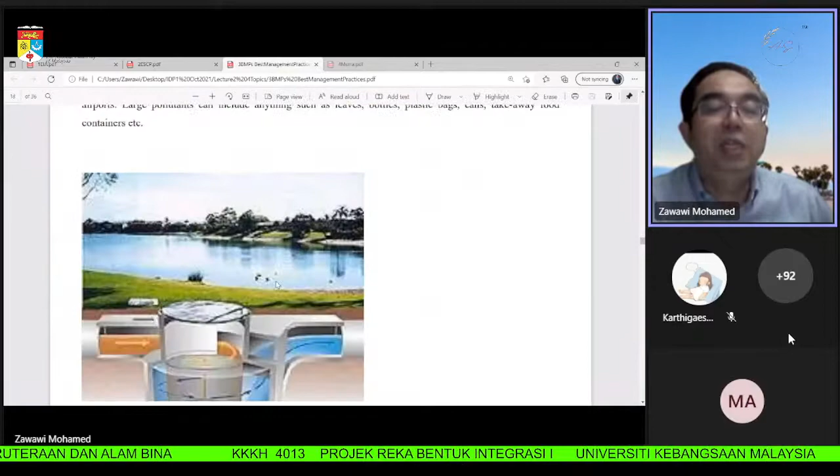The public in Malaysia is still not disciplined enough. We throw rubbish everywhere. Sometimes you smoke a cigarette and then you just throw the end of it. So all this, when it enters the river, will dirty the river. So to solve that problem, we can use a GPT.

When it rains, rainwater will flow on the road, on the ground, and then it will carry the rubbish. So you channel the flow into a GPT. It will enter here as dirty water. This is the entrance. Dirty water enters, and then there is a screen here. Rubbish will fall down and be collected at the bottom here. So it will go around, and then clean water will flow out. Then you channel it to the river. So you trap all the rubbish in the GPT.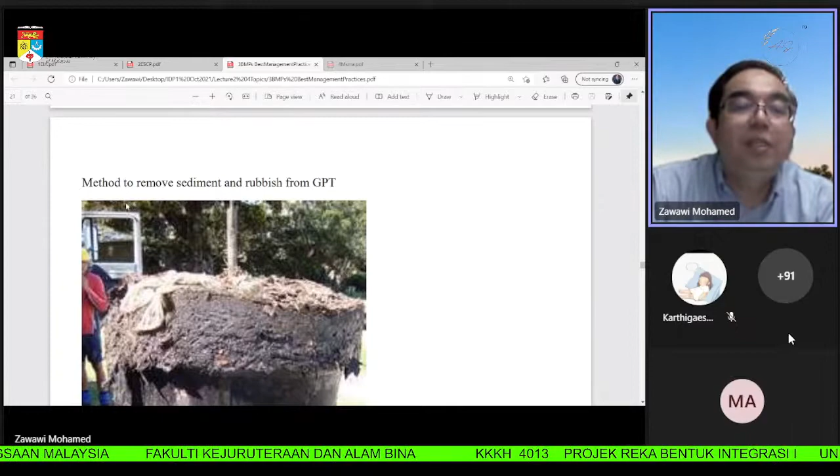Of course, if you look here, it is not just rubbish, this is also sediment. They did not maintain it. That is another unfortunate thing about Malaysia. Hopefully your generation can improve it. We must maintain our facilities. In this case, because the rubbish has not been removed for a long time, sediment also entered the GPT. So when they removed it, you can see it's filled up with sediment.

It is supposed to be removed periodically. There has to be a regular interval of removal of the sediments. How do you do it? You remove it using a lifting crane. You can see the basket here. The crane lifts the basket and brings it to the lorry, and then the rubbish is collected here. Remove the rubbish here, and then you bring it to the landfill.

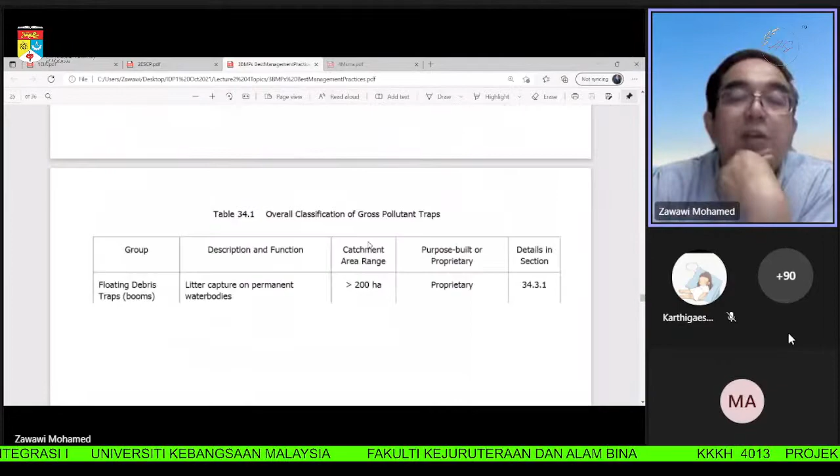Or you can also use suction. Of course, this will be more expensive. You suck the rubbish into the tank here, and then you dispose of it in landfills. Okay, these are more BMPs from MASMA. We have also gone through this before, so this one I leave to you to read by yourself. Nothing much here.

Wash trough. For your project, during construction, you definitely have to use a wash trough or water trough. Many students mispronounce this; it is pronounced as 'traff'. Wash trough or water trough. What is it? When we have a construction site in the city area, lorries leaving the site need to pass through a water trough to remove dirt from their tires. Water spray will also be used.

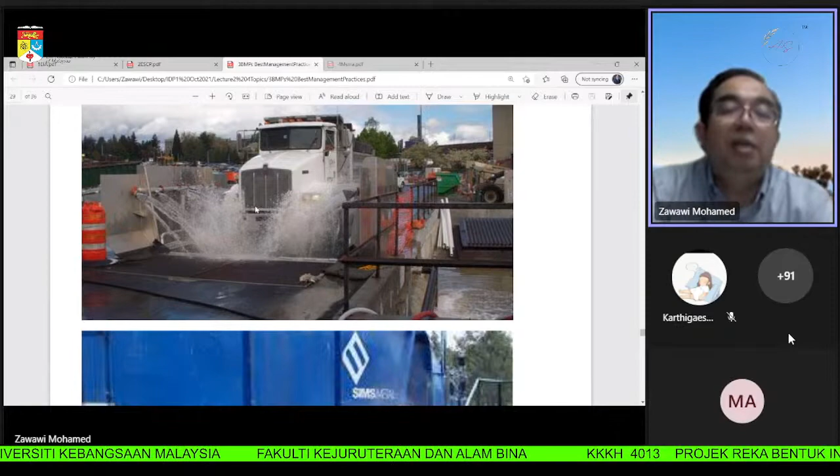The shape of a water trough is like this. You concretize it and then you put water here. Then the lorry will pass through. Then you spray the tires to remove sediments. Or like this, this is more advanced. If the project is large and many lorries pass through, you can have a system like this. In the normal case, there will be a worker spraying water at the tires to remove the sediment.

Otherwise, if you don't have this, the sediment stuck to the tires will dirty the road outside your project area. Then people will complain, and you will get a stop work order, or a summons or some penalty. So follow the ESCP.

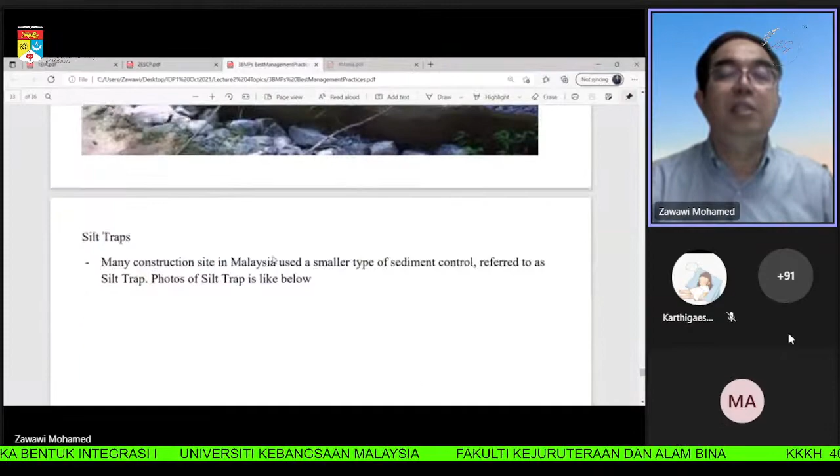Constructed ponds and wetlands, the benefit of wetlands, this one you read yourself. Erosion and sediment control measures, more info here. It is almost the same as what I shared earlier. These are things you can do: silt trap to trap silt, and silt basket for small trapping of sediments. So much info there about BMP, best management practices, and also ESCP, erosion and sediment control plan.

What did I do? Oh my goodness, I closed the... Ayah, sekejap ya, one moment. Ada pening. I have shared all, I think 3, right? Let me go through. Tengok ada apa lagi tak?

IDP1. Oh, last one, Masma. Okay, how many of us? 94. Okay, so I share the last slide. Okay, one person confirm for me. Can you see Masma? Nampak, sir. Yes. Okay, thank you. Nampak, Cik Zawawi.

Okay, thank you. So Masma, Manual Saliran Mesra Alam, or if we translate into English, Malaysia Nature Friendly Drainage Manual. This one we already covered in detail last time in hydrology class. I will not go through in detail again. I just want to highlight the big points. Again, Masma was introduced in year 2000. 1100 pages, 20 volumes, 48 chapters.

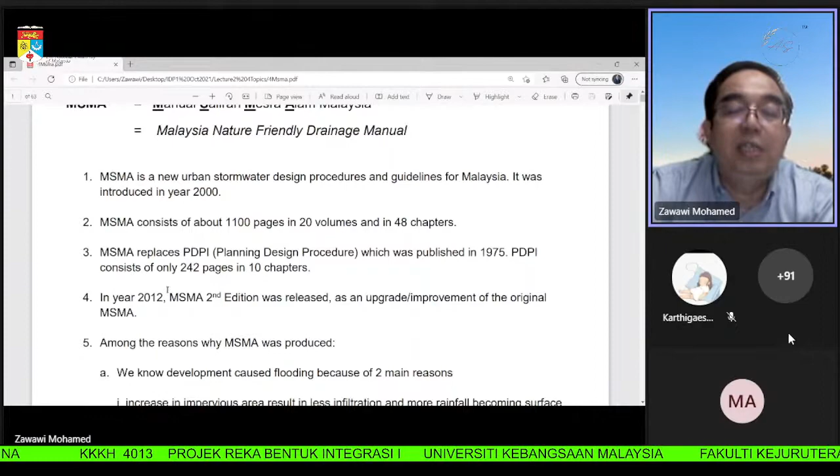And then in 2012, 12 years after the first Masma came out, DID came out with the second one, Masma second edition. I believe you all have the soft copy for this Masma and Masma second edition. So you need to go through it to read the design. They put the sample calculation and the design in there. So you have to read through it.

Okay, why did DID produce Masma? I'll jump to the big point. If you look at the hydrograph, it is a graph of Q, which is discharge, versus time. This low curve is your hydrograph before development, before you do anything, filled with trees, grasses, shrubs, etc. Then you develop it, you remove trees, you pave, you build roads, you put buildings, and then you produce the hydrograph. Your Q peak will go up very high, and then it comes down very fast.

If you remember, in the hydrology exam 2 years ago I asked, what are the differences between these two hydrographs, before and after? Number one, Q peak after is higher than Q peak before. Time to peak after is shorter compared to time to peak before development. Time for the hydrograph to go up and down before development is longer compared to after development. And the last one is volume of discharge, the area under the curve, which after development is much bigger than before development. So those are the 4 changes.

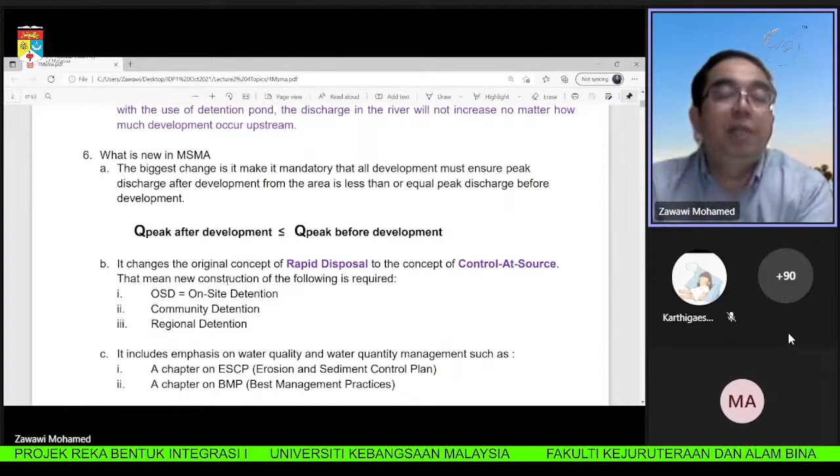So that's what's new in MASMA: it forces you to store that extra water due to your development. Where? In on-site detention. Okay, you read this yourself. This is an example, a housing area. Now in Malaysia, every housing area will have this low-lying area, which is a detention pond. We call it on-site detention. For your project, you also need to have on-site detention.

You put it at the lowest point in your project area, because all the rainwater from your project area must flow into your OSD. Only after that can it flow out to the main drain outside your project area or to the river. Because OSD has a function to reduce the flow and also to trap rubbish, to trap hydrocarbon, etc. So the water from your project area will be clean. So your project needs to have this OSD.

Don't present during the final presentation and, when we ask where your OSD is, say you don't want to put it. No, you have to put it. Okay, this is an example of a detention pond in Merdeka Garden. This is a housing area. All the rainwater from the housing area flows into this. So you can imagine the rubbish is all collected here. So the water flowing into the river will be much cleaner.

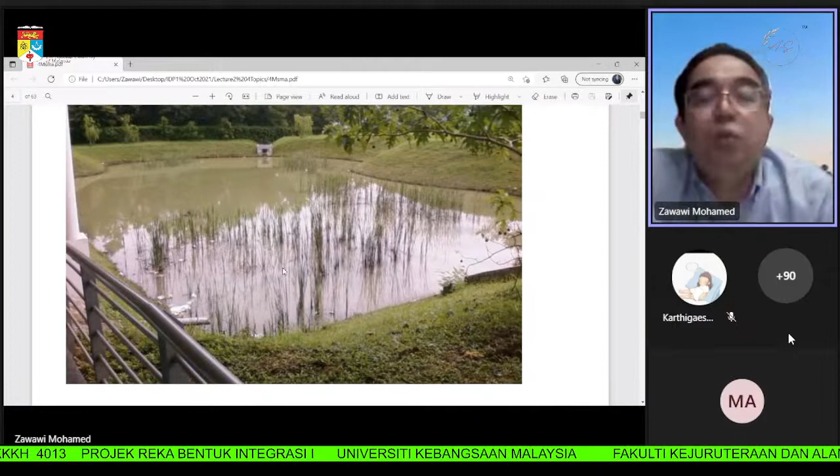Okay, this is another example. This is not a detention pond, this is a retention pond. So remember we have these two terms: retention pond and detention pond. What is the difference? Let's go through. This is another detention pond for this housing project. Retention pond and detention pond. Here is the explanation.

A retention pond is like a lake, and water always exists inside it even when there is no rain. A detention pond only has water when there is rain. When the rain stops, the water slowly goes down and the area becomes dry. So a retention pond is long-term storage. A detention pond is short-term storage. Remember Lake Kejuruteraan, is it a retention pond or a detention pond? Does it become dry? No. So it is long-term storage, there is always water in there. So it is a retention pond.

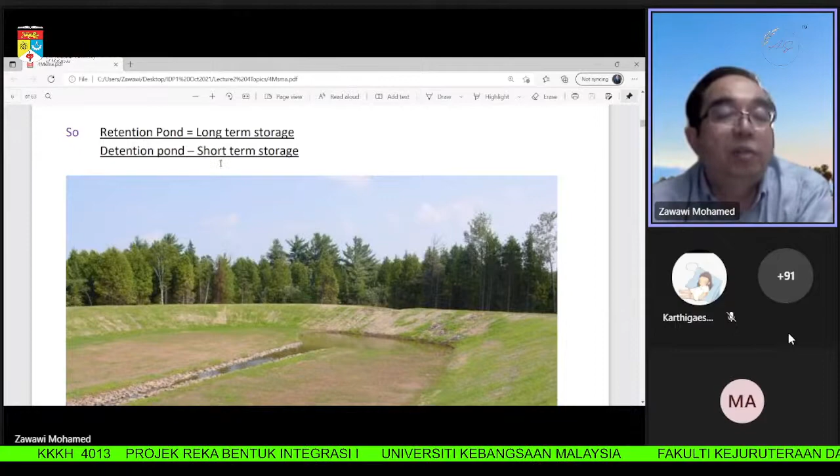If the pond becomes dry 2 or 3 hours after the rain stops, then it is short-term storage. It is a detention pond. This is an example of a detention pond, short-term storage. This one, another short-term storage. In housing areas, as I said earlier, they normally use the lowest area as a detention pond and make it into a playground. Because when it rains, there will be no children playing there, so they allow water to rise up in that detention pond. Not much, it will not cause people to drown. It is only short-term storage.

The rest you can read yourself. Is this one a detention pond or retention pond? Of course, this is a retention pond, long-term storage. Otherwise, you could not have so many trees here. Okay, this is the MSMA manual. When you download the soft copy, you can read it. This is MSMA 2000, MSMA 1. This is the cover of MSMA 2012, MSMA second edition.

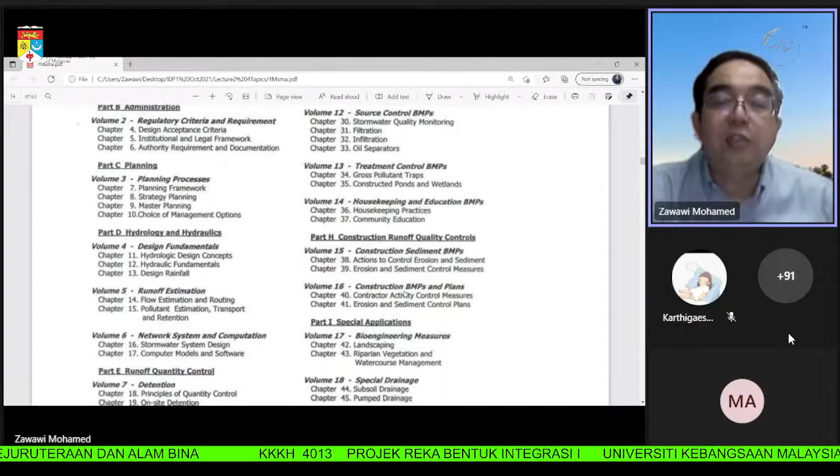This sustainable drainage, you read yourself. It's the same, we already covered this. What else here? The file overlaps, the same thing. Oh, here you have this one. Remember we covered this in hydrology class last time. You want to build a 2-house semi-detached. Let's look at the question.

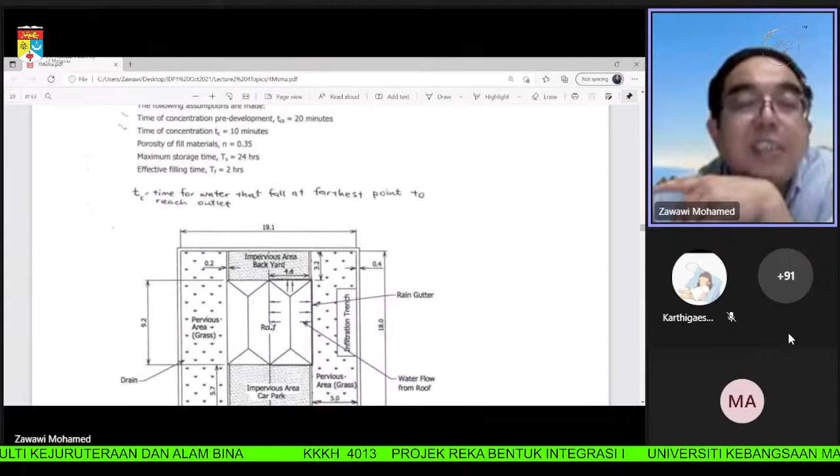On-site infiltration trench proposed for a semi-detached bungalow in Ipoh, Perak. The condition is like this, and you can see how the calculation was done. You calculate the T before development, time of concentration, and so on. Then the water will be stored here in the infiltration trench. What you do is remove the soil and put sand, so the water flows in and infiltrates into the ground. These are part of the calculation. Remember this one, ln I, A, B, C, D. We did this last time in hydrology class.

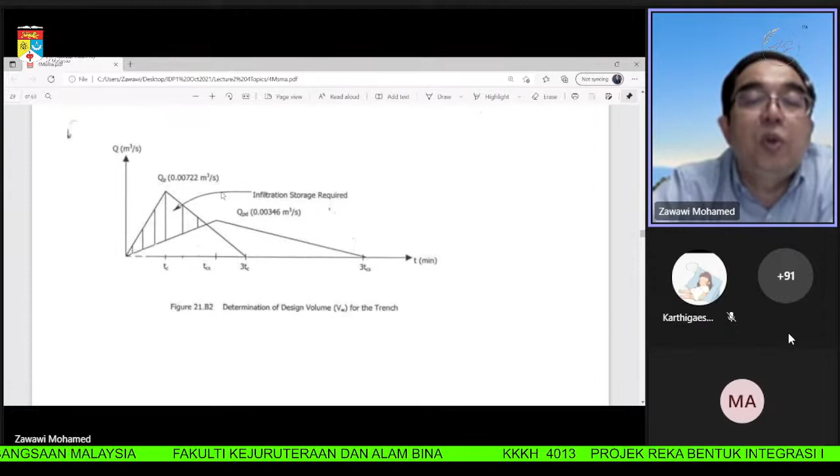So you calculate this and then you plot the hydrograph. It will be like this. This is the hydrograph before development. This is the hydrograph after development. So this amount you store in your storage. So here it shows you the calculation, how you do it. Okay, so you can see the calculation done.

Okay, this is another project. This is what project? Okay, community infiltration basin proposed for Sekolah Menengah Sri Ampang. So this is a much bigger project. Earlier just two houses. Here is a school. So you can see they do the calculation and get this hydrograph. This is the hydrograph before development, hydrograph after development.

So you store this amount of water in your detention pond. Where? Here. This is the detention pond. So all the flow from your project area will flow into the pond. And then after that, it flows out into the main drain or into the river. Okay.

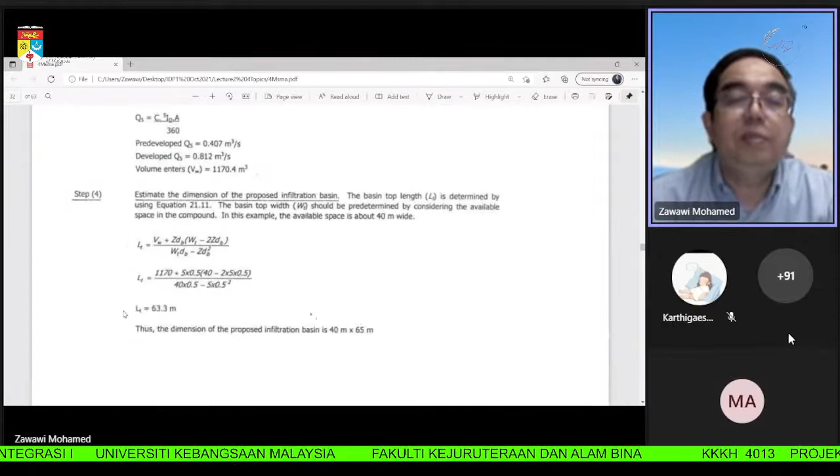Apa lagi here? Tak ada lah, I think. MSMA, okay, MSMA, and then something we have covered before. This is the polynomial, yeah. Because for you, you need to calculate again. Your project area now is not... When we did this one last time,

we used Ipoh, right? For your project area, it is in UKM, so you need to get rainfall data from Kajang station, Kajang rainfall station. Okay, the rest you read yourself. This one we already covered in hydrology. I just want to refresh, to recap again.

So many topics we covered today. Actually, there is another PowerPoint. I will see next time. Maybe if there is another lecturer, I can join in, basically. Because I want to cover that one also. That one showing you the importance of ESCP, Erosion Sediment Control Plan.